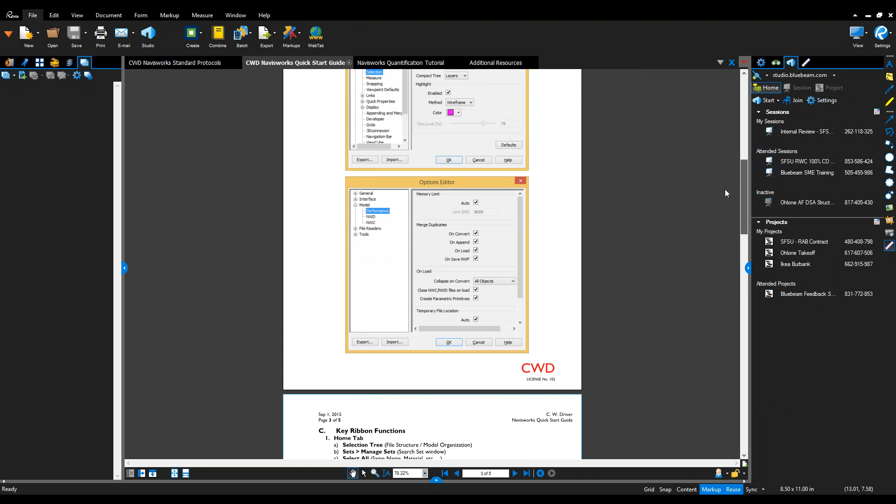All right. So those are the 4 PDFs we're talking about. Protocols is standard ways of doing things. The quick start guide is kind of a work in progress, but the idea is to get you up and running, kind of a self-tutorial on setting it up and where everything is.

And then we have a more detailed Navisworks Quantification tutorial. It doesn't have any pictures, but it walks you through from start to finish. So a good resource. It's about 6 pages long and goes through all the steps. And then there's a PDF called Additional Resources, which has a link to my old professor Kevin Miller's. He has a bunch of tutorials and information on this same subject as well.

So I wanted to go through the protocols, and then we'll jump into the software. All right? Okay. Any questions so far? Nope. So far, so good.

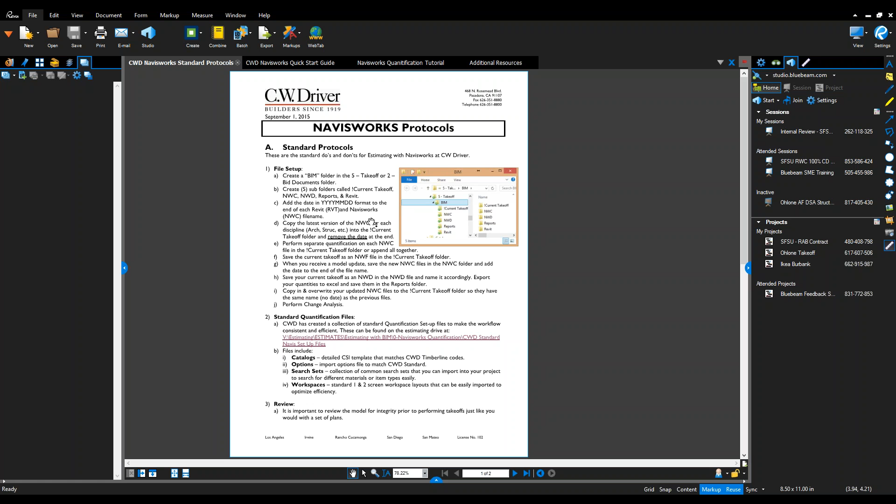So file setup. That's the first thing that we like to standardize when we're using files. So say, Rika, you've got your project coming up where you're going to be able to get the Revit model from the architect early on. The best way that we found is to make a BIM folder either in your takeoff folder of your estimate or under bid docs, wherever you want to make it, and then have these 5 subfolders. You have an NWC folder, NWD, those are both Navisworks file types, and then a Revit folder. That'll be where you drop the original Revit file, and then a reports and a current takeoff.

So that's the folder structure that we've identified that we think is the best, but obviously you can let us know if something's different. So this is in each of the project estimating takeoff files? Correct. Yeah. Which is nice because with Timberline, we don't keep the files in the same job. Right. Timberline is all centralized. Right. Yeah, we could, but we don't do that. So it's nice to be able to keep everything in one place in the jobs folder. Definitely.

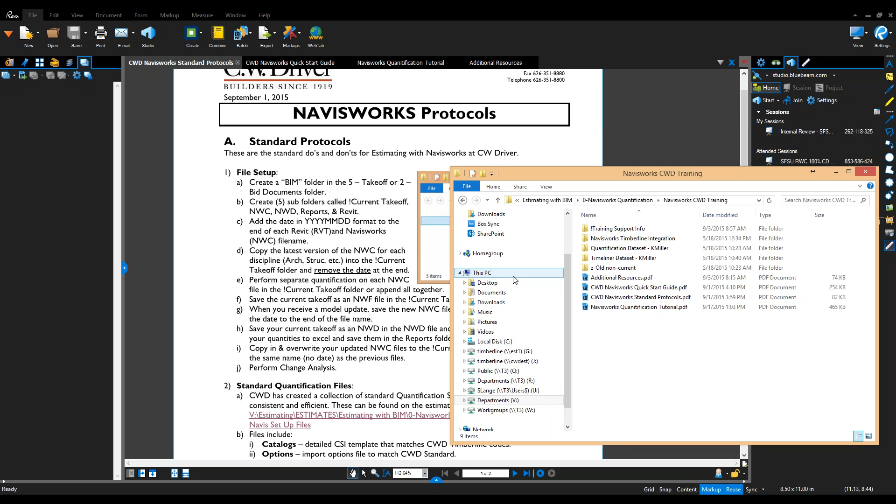So we set up these folders, and you'll notice the files that I had you guys open or download are in that format, that BIM Tutorial Files. So that's the format that I did it. And then we want to make sure when we download the files that we put a date stamp on the end of the file, because inevitably you're going to get updates.

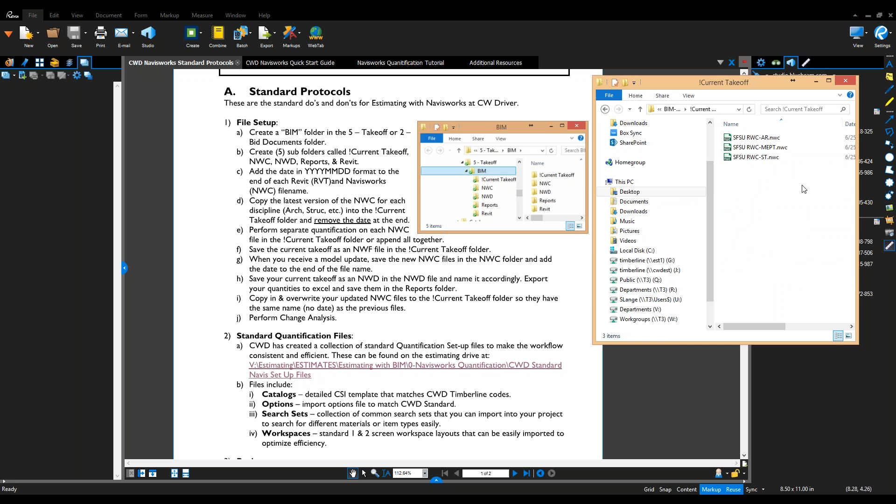And so if you notice, this is the file that I had you guys download. Inside the NWC folder, there's the aquatic, and I put a date stamp. Then there's the architectural, with a date stamp, and the structural, with a date stamp. So the idea is that you can keep track of changes easier that way. Okay? Mm-hmm. And then I have the current takeoff folder where we just drop it in there, and we take off the date stamp. And I'll tell you more why later.

So that's basically the folder structure. Then we have some standard setup files that are in that Navisworks Quantification folder on the V drive. Basically it has standard catalogs, which is like your template for your takeoff. So we've done some work at setting that up for you already.

I even have options. You can import an options file, so you can have the same options as me. Search sets, which is a way to say, okay, I want to find all the concrete in this project and select it all, or I want to find all of the exterior walls in this project and select it all. So ways to get through the model; we set up a bunch of those as standard ones, so it'll make us more efficient. And then workspaces, basically the way that Navisworks looks, you can just import that in and have it be the same every time once you like it.

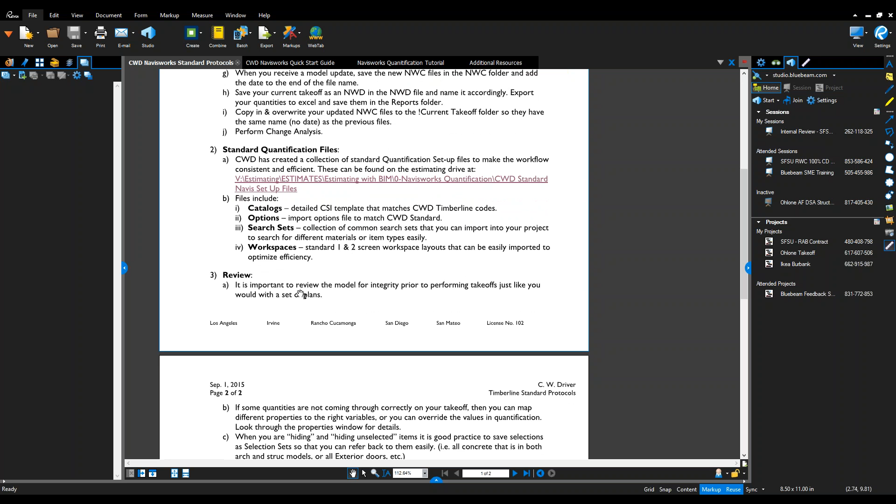So those we'll go through in a minute as well. And then I just wanted to point out on this how important it is to review the model. And I think, Rika, did Todd sit down with you and go through doing a takeoff at one point? He did. He showed me a few steps, and it's been a while, but yeah, he showed me how to do a few of the takeoffs. Okay. And I know, John, the same thing for you, right? He showed you a little bit.

Yeah, I got the early model for the Europa Village, and we played around with it for a while, but like Rika, it's been a while. And actually, we're in the DD phase. We just got new updated plans for that job, so I'm going to probably ask for the model after I bid it, because I don't want to learn something during the bid process. But I do want to get into it after that, so this refresher course is fresh on my mind. Good.

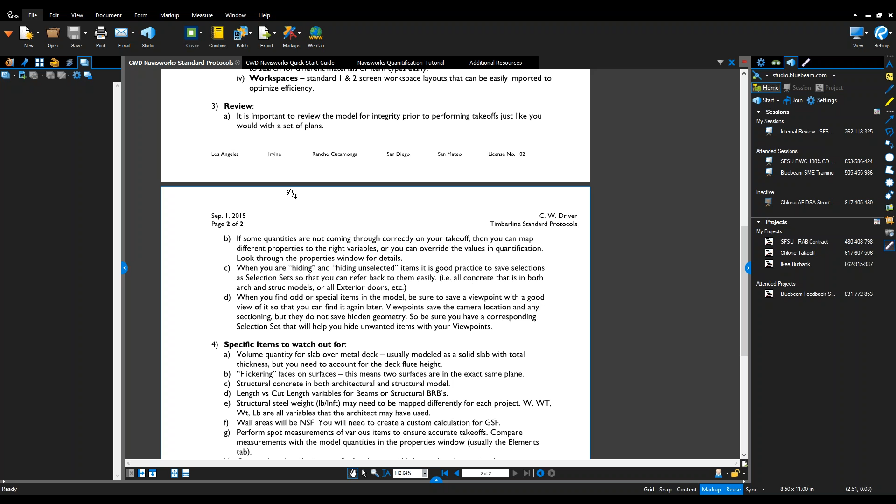So as you guys probably both know and found out, sometimes there's things that are either not accurate or misleading in the model, or can be confusing. So I've tried to identify some of the things that you can look out for. And so obviously it's important to review it so you have a level of confidence with your takeoffs. Just like a set of drawings, right? It can be a crappy set of SD drawings with not a lot of detail. The model can be the same way. You just have to make assumptions.

So some things to note: if you pull through all your concrete and your volume is very different than what you would expect, sometimes maybe the architect changed the name of the variable and they're not coming through all the way. So it might have a 0 volume when really it was mapped as something else. So you can remap variables to make sure all those still come through automatically. That's just something to know at this point, and we can go through how to do that later.

Glad the estimator is still needed. Yeah, right.

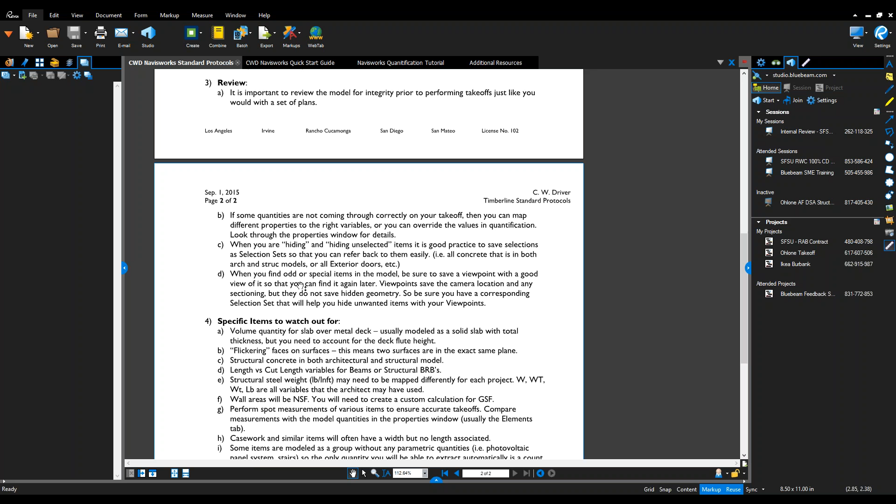Yeah, totally. I think I'm preaching to the choir, but it's no different than a set of plans where you still have to make assumptions, you still have to use your head, and it just helps you do things a little quicker sometimes. It's also good, when you're hiding things with the hide unselected button, to save your selections so you can come back to them later. We'll show you how to do that when we get in there.

And it's the same thing with viewpoints. If you zoom into a location inside the building and you want to refer back to that often, you can save a viewpoint, and it'll jump back to that spot. So those are some things to think about as you're doing your takeoffs. And then these are items that can give you problems. Slab over metal deck is going to have the full thickness, so your concrete volume is going to be heavier than it actually is, because of the flute heights.

If there's flickering surfaces, that means there's two surfaces in the exact same plane, which means there could be an issue. A lot of times your structural concrete will be in both the architectural and the structural, so you have to do a little QCing to see what's your full scope. I'll just breeze through. Wall area is always going to be in net square footage. Usually we take off walls in gross square footage, going right through doorways and windows, so that's something to be aware of. You can override it, but you just got to know what you have. We always perform spot measurements and check the model to make sure things look right.

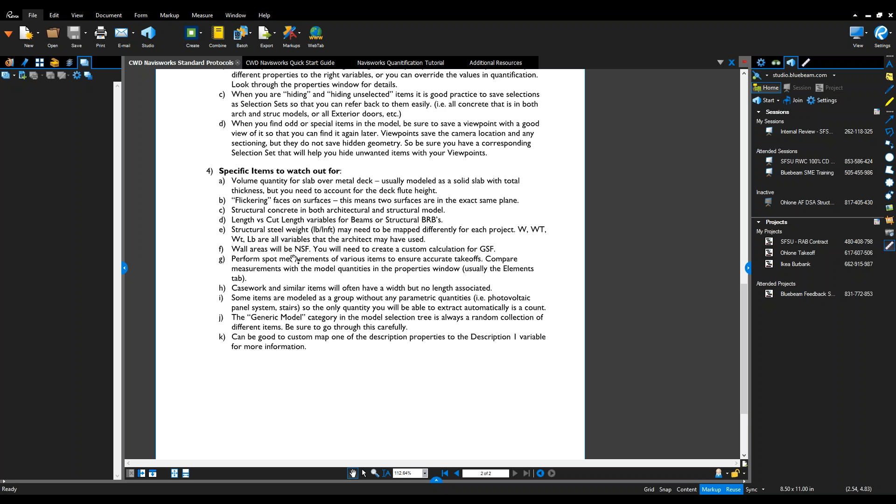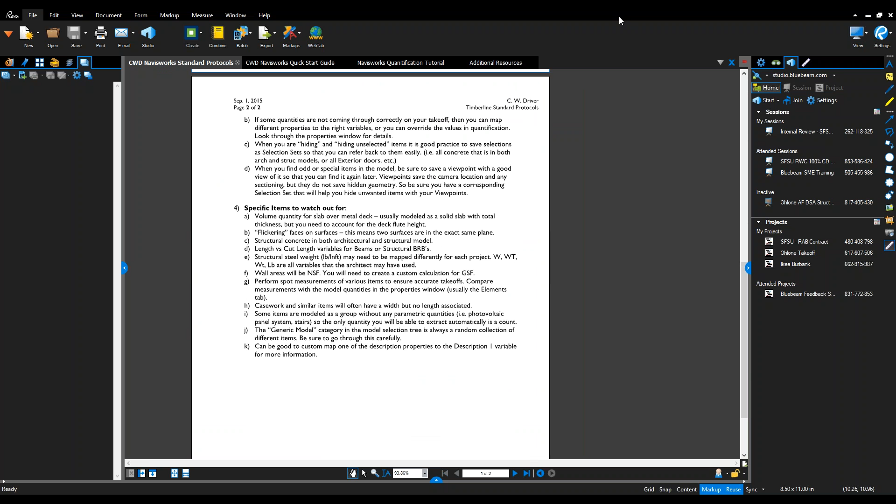And then these are just some other items, but I think I'm just going to jump into the software. You guys can look at this at your own leisure. But I want to jump into Navisworks. So any questions on this document, the Navisworks protocols? No, I think I just need to run through it and run a project with that in mind. Yeah, same here. And it's a work in progress, so I think it's a good start, this little cheat

sheet. So let's go ahead and open up the BIM Tutorial Files, and in here we've got the current takeoff. So let's go ahead and open up the architectural model in the current takeoff. Just double click on it, and it should open up Navisworks Simulate.

So in the BIM Tutorial Files is current takeoff. Right. And within there are SFSU. Correct. Yeah, do the one with the AR at the end. Okay. I'll drag mine. So it's asking how I want to open it. So now, gosh darn it. So yeah, make sure you choose Simulate.

Mine says can't resolve external reference. So go ahead and say ignore all. For whatever reason, that happens with almost every file. I think it has something to do with when you export it from Revit, it was attached to a project file, a family that linked all these different models together, and now we're opening up onesie twosies. So I think that's why. But yeah, always just say ignore all when that happens.

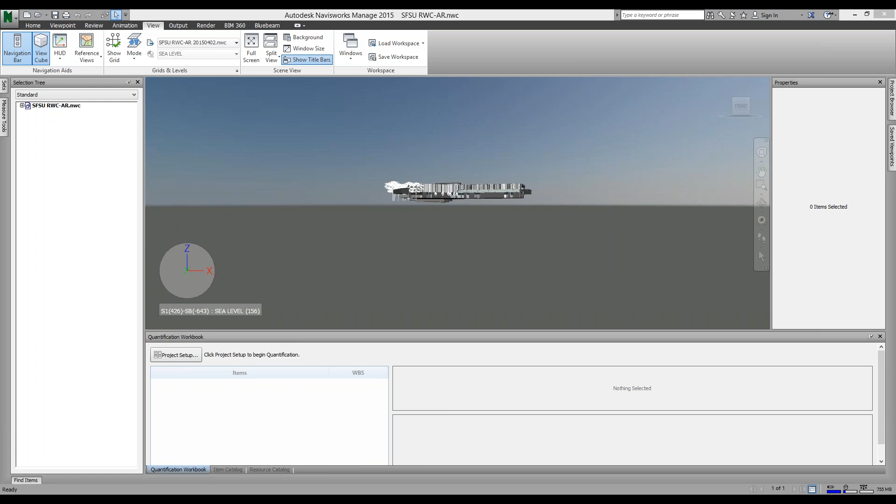Guys, I have to step out real quick. Okay.

Are you able to see it? So double click on the Simulate. Are you able to see my screen? I am, yep. Okay. And then scroll down, see if there's an application file in there. Yeah, it looks like it's not. If you just click on your Windows start button bottom left and start typing in Simulate. Yeah. There we go. So it doesn't look like it's installed. Right, Todd? I don't know.

Right. So I would say we'll just put in a service desk request and get them to install that. I'll follow up with them and make sure it's the license for Simulate. And John, I'm gonna throw up an NWD onto the Q drive so that you can open it up with Freedom, and at least you can get around navigating the model. So if you go back to the Q drive under BIM Tutorials, I've dropped this ar.nwd file. NWD, okay. It's the very bottom one. If you go back up one folder, it's that file at the bottom. Oh. Yeah. So at least you'll get familiar with how to get around.

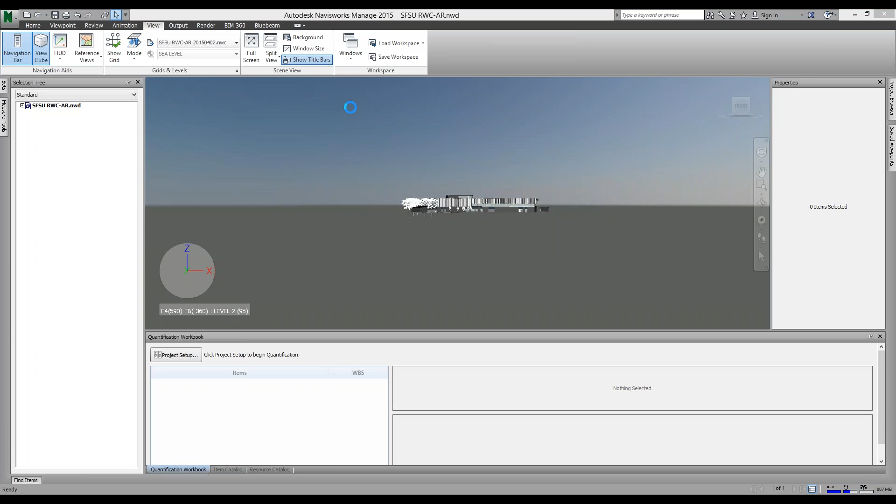Okay, Stuart. So you went back to being the presenter. Yeah. So now, I pulled up this. Oh wait. Should I be seeing? Oh, there we go. All right. It's loading. And it'll probably have some external reference errors, so you just say ignore all when you see those. Okay. So let me know when it pops up. Okay, 100%.

Doesn't look like anything. Oh, there we go. There's another screen coming up. I think nothing popped up, so it's kind of populating the drawing. Okay. So I'll just kind of walk you around this. I know you're a little familiar with it, but basically you've got your model view screen here. You've got your view cube.

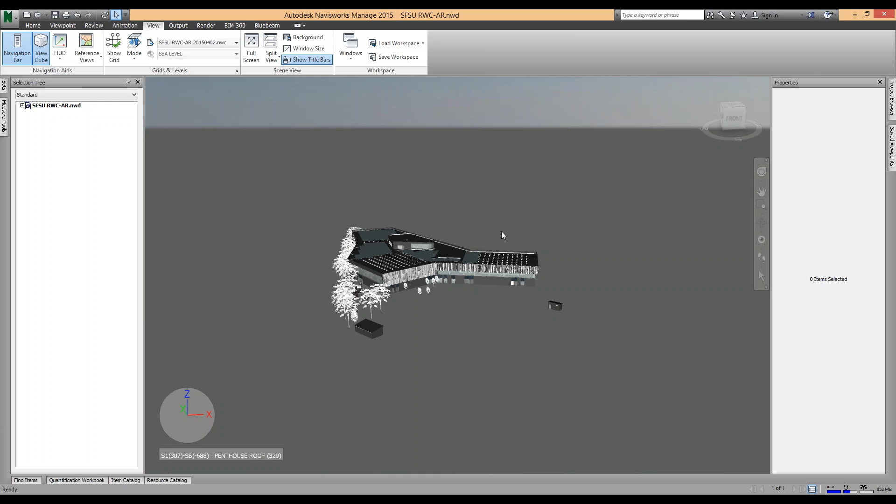So with this, you can always hit the home button, which sometimes if you kind of get lost off in space and you're like, where'd the model go, or you're zoomed really out, you can just come here and hit the home button, and it'll give you a nice shot of the entire model. Okay. You can also click and hold down, click and drag to rotate using this. Yep, I remember that one.

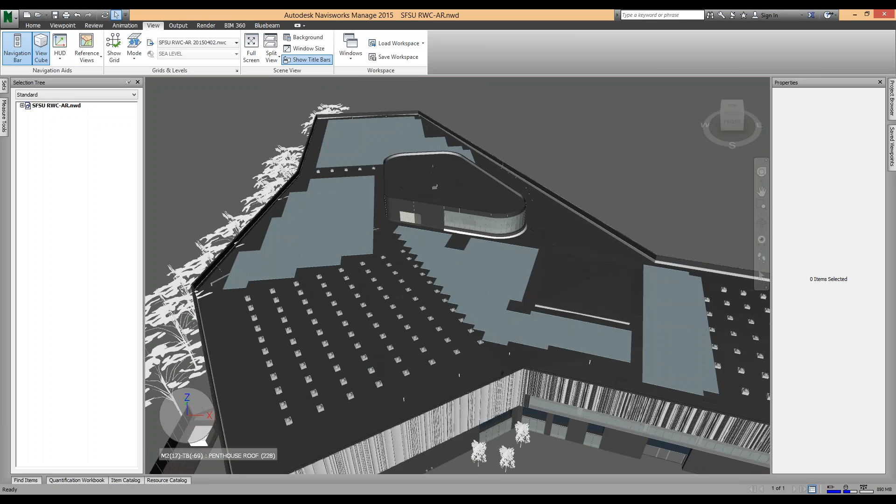And if you click on your scroll wheel and hold it down and move your mouse, that's the pan. So, and then just scrolling your scroll wheel zooms wherever your pointer is. So between the pan and zoom, you can get around your model pretty good. And then the last one you need is the orbit. So you can either use

the view cube, but I like to hold down shift and then click on the scroll wheel, and that orbits. Okay. So those three movements are the way I get around the model the most. I zoom, pan, and orbit to get around. Okay, are you able to do that?

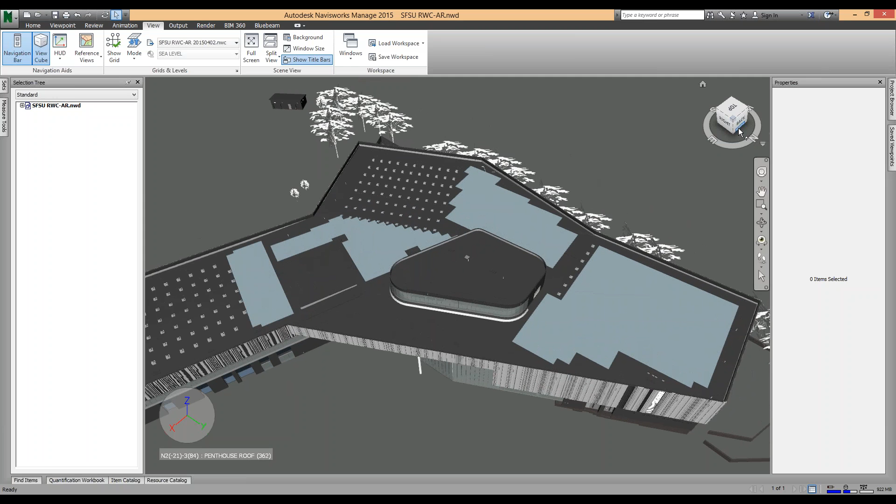Okay. Well, I've got to go, because I've got the, okay, so here we go. Wait a minute. So, I'm back on, Stuart. All right, cool. So every time when I went back into the file, it repopulates. It's a little slow. Oh yeah, so I would probably copy it down to your desktop and then do it. That's because it's on the network drive. That's why it's probably a little slow.

And you can also change the rendering settings on it if you want to do that. Under Viewpoint tab. Right. And then lighting mode, yep, to shaded. So are you still on my screen, Todd? No, I'm looking at Stuart's. Oh. Yeah, because right now it's just having a hard time populating. So should I just save the whole thing? Let's see. Yeah, I think bring it local. That'll be the first thing, and then the second thing is I would change your appearance so that it's shaded.

And so Rika, why don't you do that as well? So go to the Viewpoint tab, and then we're going to go to Mode, and then Shaded, and you'll notice it's just kind of solid colors now. And so that'll help. That usually helps a little bit, and we like to do that in quantification anyways. I don't see a mode in the Viewpoint tab. It'll be under the render style. If your window is a little smaller, it might be squished together. But

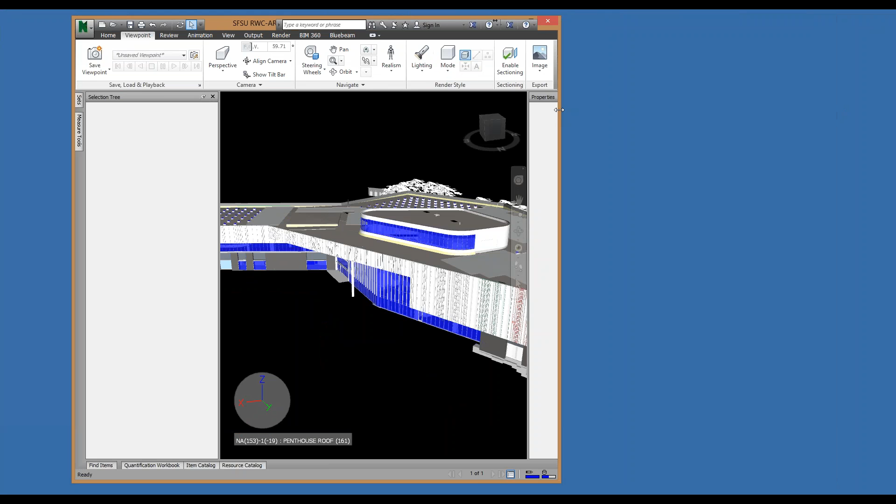So for instance, the first thing I want to do is save it to my desktop. So I'm trying to do that, and wouldn't that be at the home button, file option? It's actually the N button. Right here. It's that N at the top left, the big N, and then you can do Save As. Oh, I see.

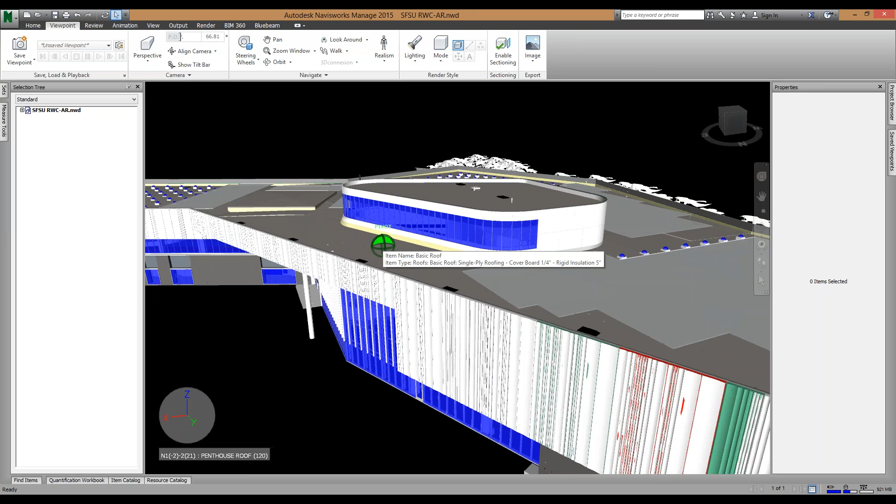So while you're saving that, Rika, basically getting around, there's three tools I use. It's Zoom, which is scroll. You just scroll and it'll zoom wherever your pointer is. And then if you hold down the click wheel on your... You mean the scroll button on your mouse? Yeah. So is that working for you? So if you scroll down, it'll zoom in, and scroll up, it'll zoom out. Yeah. And then... Go ahead.

I can't save it. I hit that N button and there's no save options. It's new, open. So what you want to do, John, is go to your file where I saved it. Let's see, and just copy that NWD file. Okay. So I get out of this? Get out of it. Yeah, you can exit out of that, copy it, and then paste it onto your desktop, and then open it again. That's what you'll want to do.

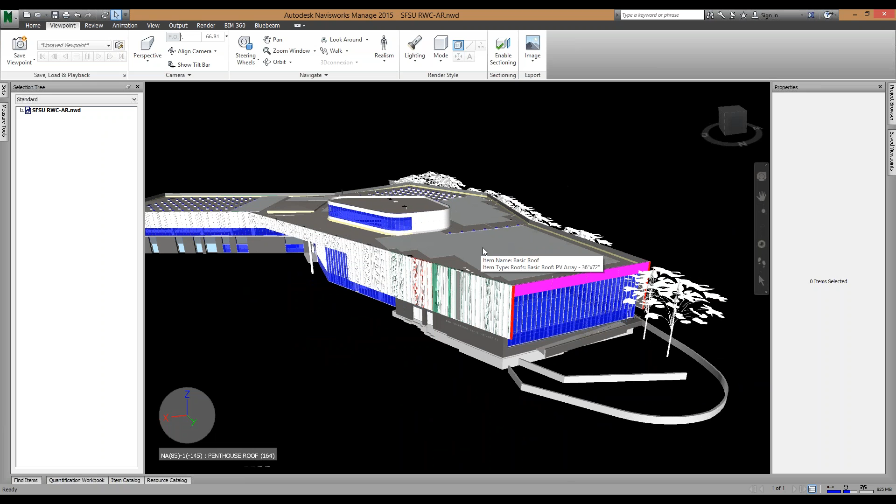So Rika, you've got the zooming, and then pan is you click and hold your scroll wheel and then move your mouse, and that lets you kind of pan over in the same viewpoint. Okay. And then if you hold down shift and then click the scroll wheel, you orbit. And it orbits whatever you last zoomed on. That's the pivot point. Okay. So those tools, that's how I kind of get around. I pan, zoom, orbit, zoom, orbit, zoom, pan. So that's kind of a good way to get around.

There is also the walk tool, which you can get to under the Viewpoint tab, walk. Same with pan or orbit. You can just click those and be in that mode. But the walk, there's a shortcut for it, is a good kind of smooth way to walk through the model.

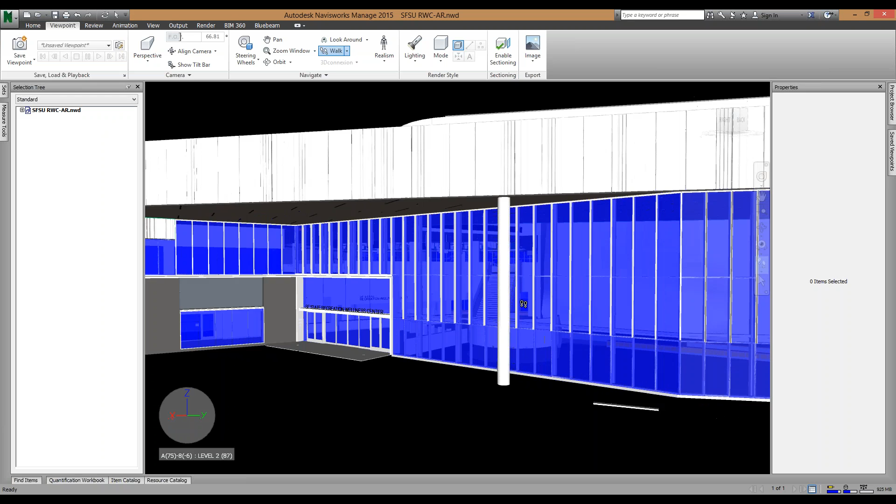So it works where you click and hold down your click, and then if you go up, it moves you forward while you're holding down. Back moves you backward, left turns you. So you can kind of walk through the model, walk through walls, and get around that way too.

And if you want to go up and down, you can either click and hold the scroll wheel and then go up, and then kind of walk through so you're right on the right level, and then click and hold on the scroll wheel and drop down. Let's go down a level. Let's see, here we are.

I'm really close to a wall here. I'm going to back up. So that's kind of the basics of getting around Navisworks. Does that make pretty sense?

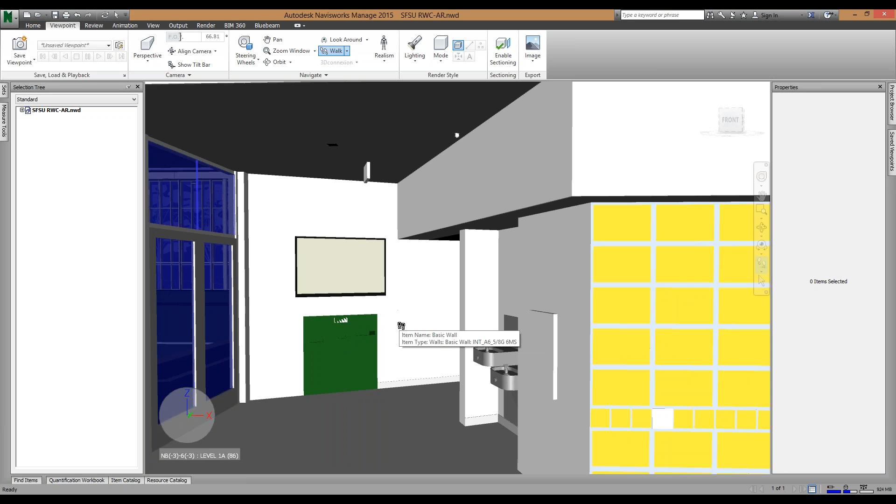Yeah, I know. Playing around with it a bit, and the screen kind of moves. You lose your...

Yeah, and then if you don't click the scroll wheel, and you just scroll up and down, it looks up and down, like tilting your head.

So it's kind of like... how do I get into the building? I can't seem to get in. It keeps moving the whole building up or down.

Gotcha. So if I'm outside the building, are you able to walk forward? So just in walk mode, you just click and then drag up, and it moves you forward.

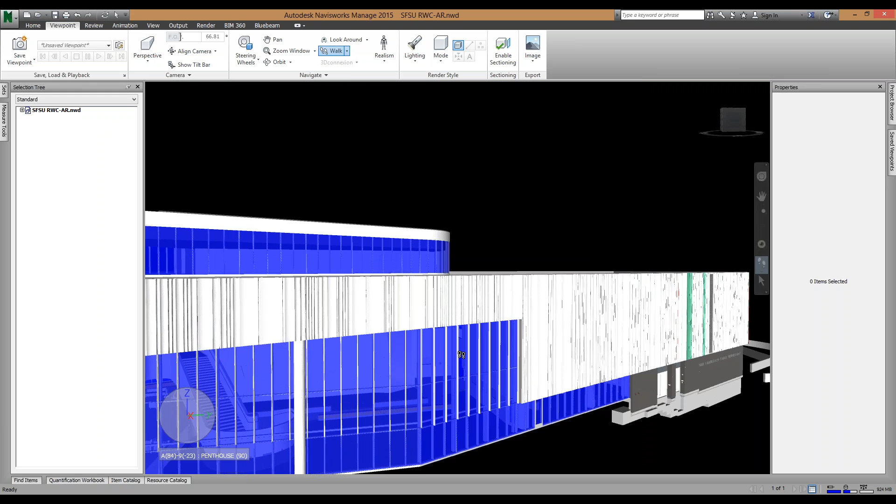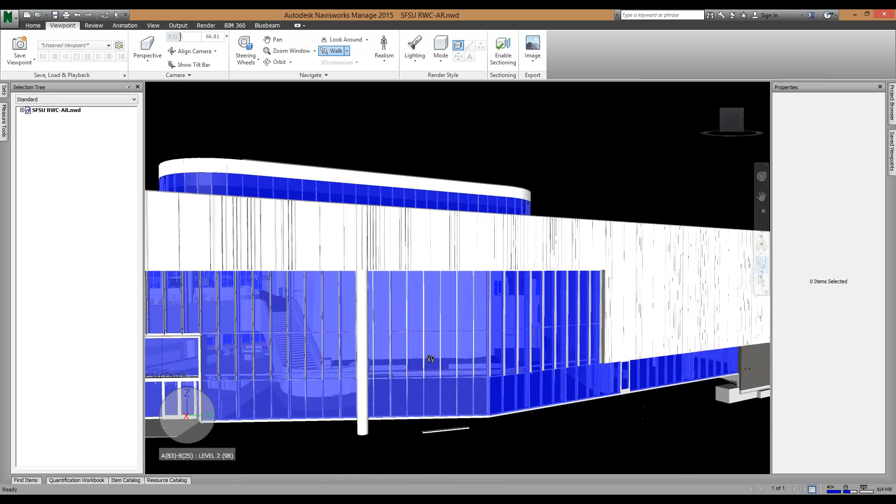So if I walk to the front of the building and then just drag up... yeah, it still keeps me on the outside of the building.

Does it hit like you stop? Like does it feel like you're running into it and then you stop, or is it... are you no, it actually moves the building up or down, or forward or backwards.

I'm sorry, let me give you the screen so I can see what you're seeing.

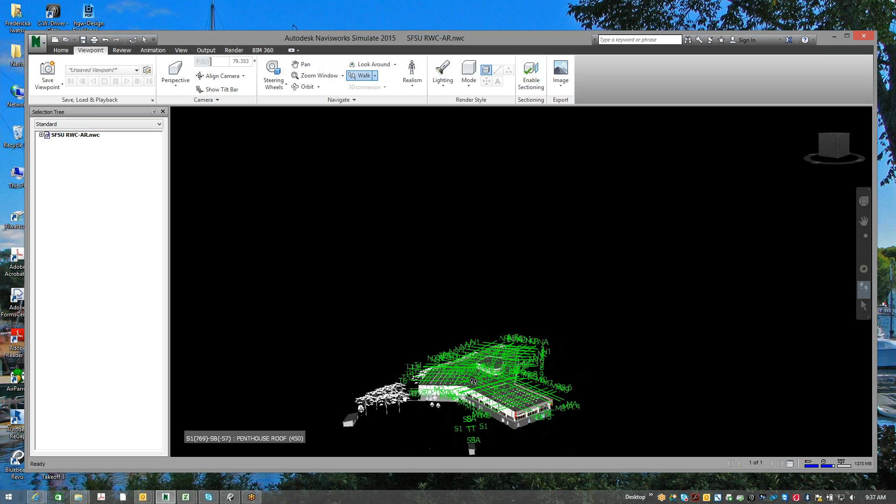And then, so yeah, that's tilting your head up and down. So come lower. Now we're getting closer, okay. And now scroll, just scroll up just a little bit. There you go, so you're looking more straight at it.

And now walk straight at it by just left clicking and then dragging up. Oops, sorry. It's okay. So that's with your left click instead of your scroll wheel.

Try left click, it keeps giving me that. Yeah, just like the regular click. My other left, you mean? So...

There we go, okay, back to basics. Yeah, there you go, all right. Software, it's all weird, there's all these little shortcuts. It's never the user, right?

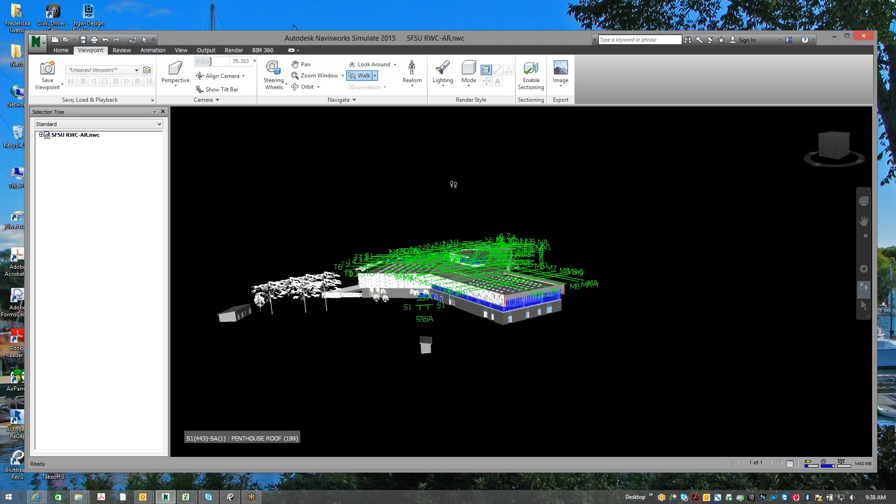Yeah, right. So you can kind of go between clicking up and dragging, walking straight, and get closer and closer. So click and then drag up again. Let's walk a little closer. Let's walk till you're right over the middle of the building.

Yeah, okay. And if you drag it a little left, it'll kind of veer you to the left. So that's the pan, that's your click wheel, your scroll wheel. So click just the left click. Oh, now you're turning. Yeah, see how if you go right, it turns you.

And now just click and drag straight up. And let's go till you're literally... the left key, the left click straight up. Yeah, left click, okay.

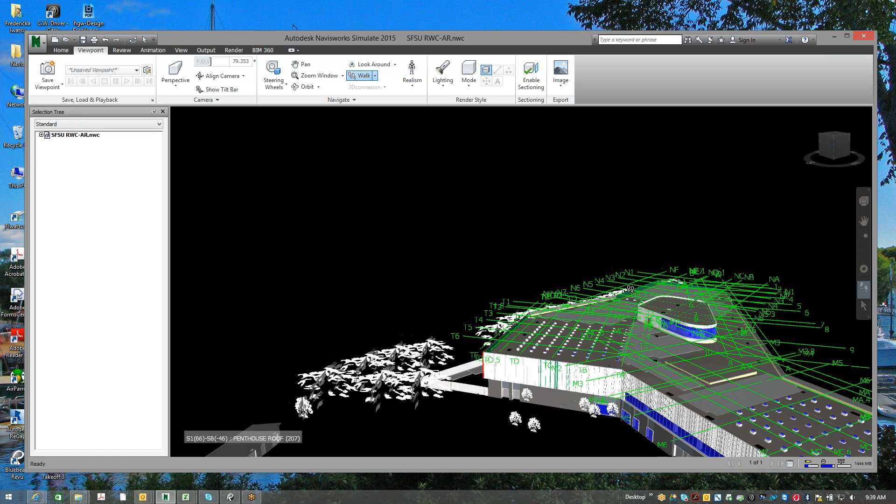Okay, keep going up. Yeah, keep going, and then you can veer it a little to the right, so you're turning towards that penthouse. Oh yeah, it's sensitive. There you go, a little more. Let's go a little more till you're standing over the building. Think of your viewpoint as you. Keep going a little more. Okay, now click the scroll wheel, hold it, and go down. Let's drop you down inside the building.

Okay, so I literally had to be over the building? Yeah, exactly. Got it, wherever you're. Oh, still not quite. Oh okay, that's close, sorta. So now just go forward a little bit, with the left click, not the scroll wheel. There you go.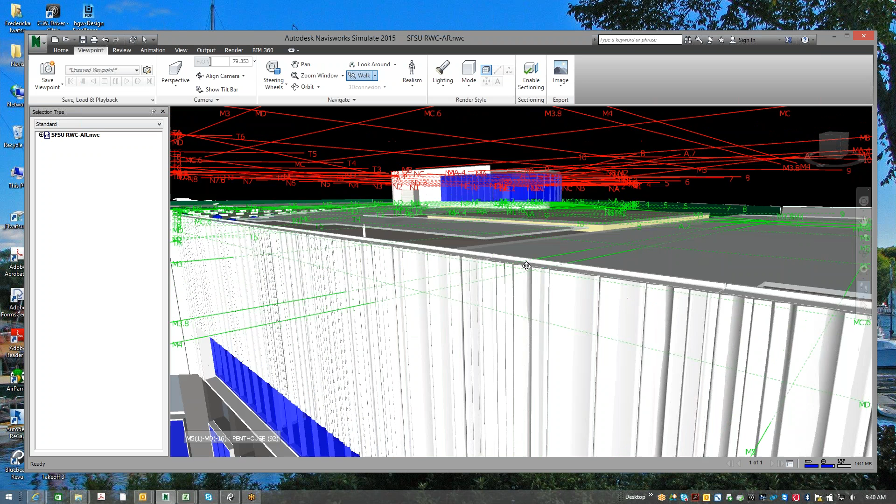Now I need to come down a little bit, right? Yeah, so you can move forward and then come down. Oh okay, got it. So it's kind of two different modes: with the left click it's more just going left, right, forward, back. With the scroll wheel it's up, down, and then sidestepping.

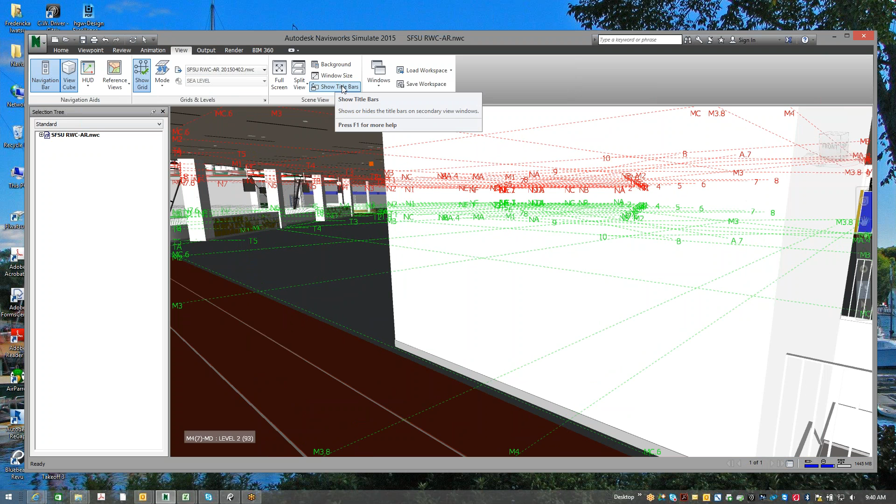Okay, so I noticed you got all your grids on. So go to, is it View? Go to the View tab, and click on Show Grid, then unclick that button, and it gets rid of all those grids. Sometimes that's nice, but we don't want them right now. Do you want the screen back? Or I guess you can take that back, huh? Yeah, let me grab that back.

And John, are you still on? Are you okay? I was just watching you guys because I was trying to do the same thing with mine, and it was very confusing. But then the grid deal really helped. Yeah, now it's much better without them.

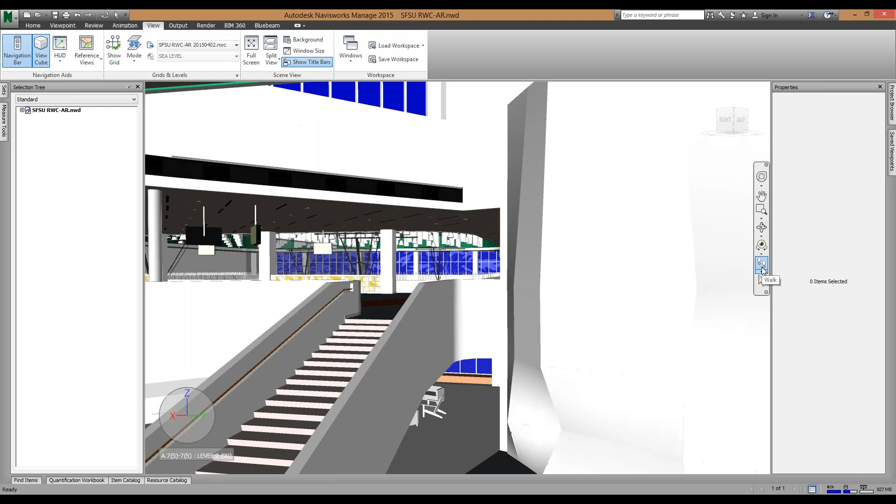So yeah, I'm sort of, you know, I'm using my mouse to go in and out. Okay, and then when I do that, there's a little pivot type thing that comes up. Yep, so when you're in the pointer mode and you scroll, that zooms in, and it shows where your pivot is. Oh, that's just, okay, so that's nothing big.

And then most of it is done by what you call the scroll wheel, is that what it is? Which is, or the cube, I guess? Well, so the scroll wheel and the cube can both do kind of similar things. Using the mouse is like the shortcut, but you could also drag the view cube around to orbit around your last pivot point. Okay, so I see what you're saying. So I set the pivot point with my mouse, and then I can orbit around with the cube.

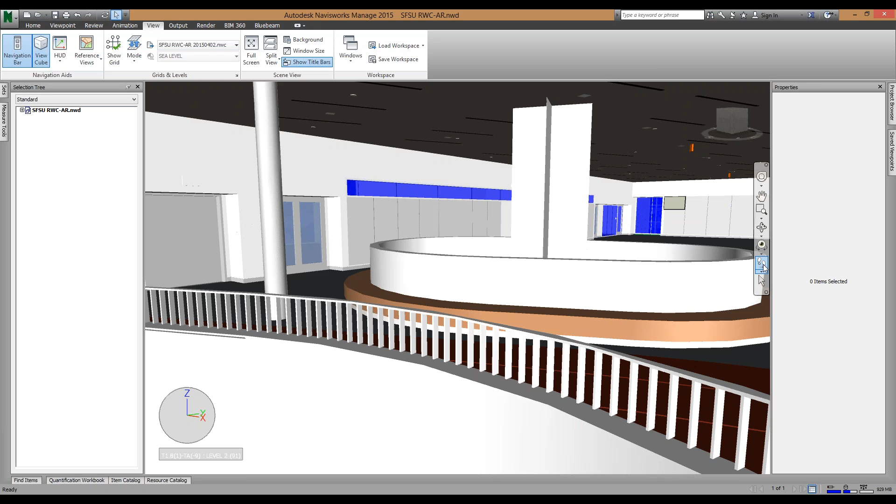Yeah, and then, okay, so there's a cube, and then there's that little circle around it. Yeah, so you can also click on the faces, and it'll give you kind of standard views. That's what the circle around is for, just for reference. So I can click on any part of this cube, and it'll give me that standard view, you know, elevation view.

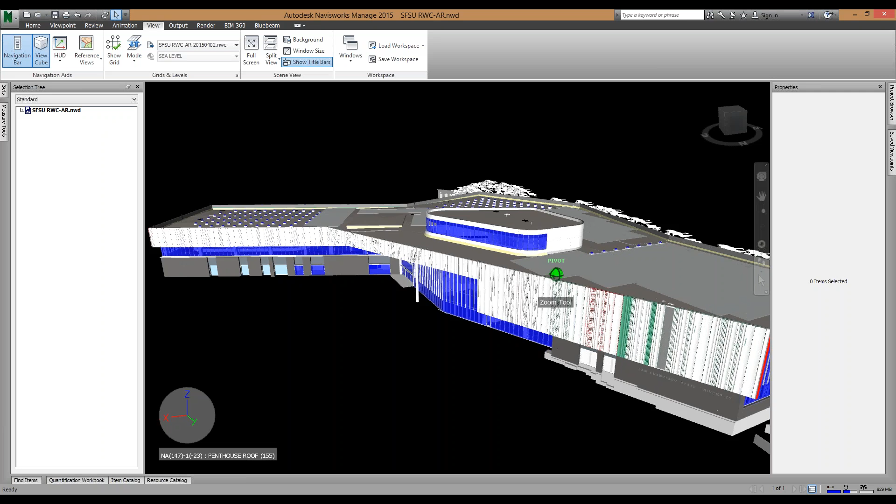So did you ever, when Rika was saying to walk in the building, you actually didn't, you got close to it, but you didn't walk in. Yeah, so you can by using the walk mode. Oh okay, so there's the pointer mode, which is zooming and orbiting, and then there's the walk mode, which is literally like you're in a video game, like a first-person shooter. So by alternating using the left click and dragging or the scroll wheel click, you can get around and then walk right through the building.

Okay, I really have to get into gaming. Yeah, right. So I'm gonna keep moving forward because I want to get into the quantification part.

So let's make sure we're on the viewpoint, we're in the mode of shaded. Viewpoint and then mode shaded. And then if you go to the home tab, we're going to start quantification. So when I drop down my mode, there's no shaded. It's above and below, above, below.

Are those his 3D grids, or the grids that it's referencing? That's what it sounds like. So would it have been some of these? No, under the view rather than viewpoint. Gotcha, yeah, there's two modes. Yeah, you're right, good call. So it's under viewpoint. Oh okay, and then mode shaded. Well, under viewpoint, I don't have mode.

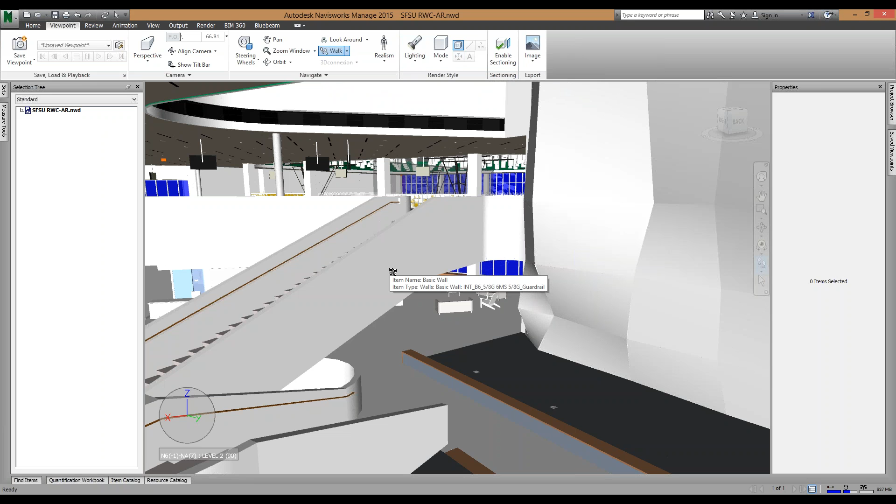Okay, good. So now, John, we're going to be moving forward with things that are in Simulate and are not in Freedom, so you'll just kind of have to watch at this point until you get that installed. So basically, those steps are you come to the Home tab, and then you click on the Quantification button.

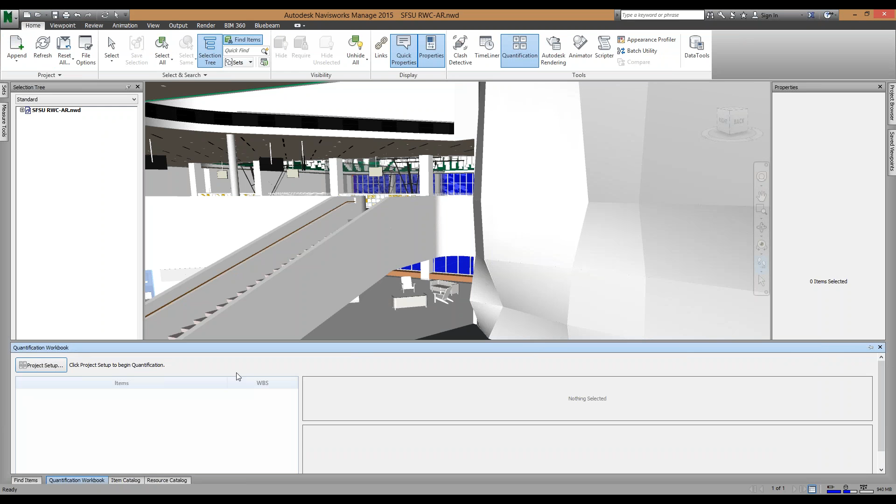Which opens up your quantification workbook. And it may or may not be pinned, so you can pin any of your windows and make them stay by clicking on that little thumbtack. And then we want to click Project Setup under the Quantification Workbook.

So are you there, Rika? Yep, project workbook, and it comes up asking would you like quantification getting started tutorials. Oh never mind - yeah, so then it should bring up the wizard. Sometimes it asks if you want to learn more or something. Yeah okay, I got the wizard - I think the same screen you have.

Cool, so let's just for basic purposes do no catalog, so say none, and then next, imperial, yes. Model volume, we're going to change to cubic yards, just because usually that's what we need, and then next, then finish. You said model volume cubic feet, right, or cubic yards? Yeah, change it to cubic yards. Okay, next, okay, right.

And so right now it's all blank, the quantification workbook. But I just want to show you how to do a standard takeoff, and then later I'll show you how we can be more detailed and actually have like a CSI template, which Todd probably showed you before.

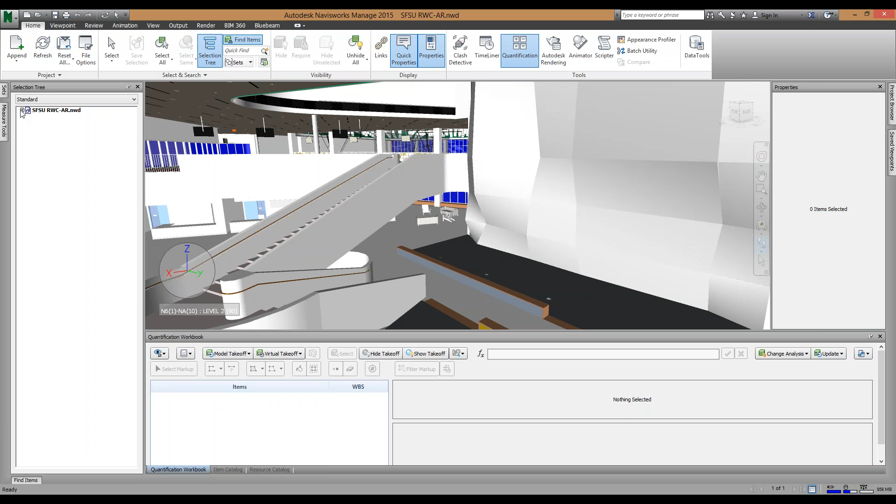So do you see your selection tree? Yes. Okay, if you ever don't see something, you go under the View tab and then Windows, and that's how you turn on or turn off different items. So the selection tree is checked, so that's good because we want to see it. But if you didn't see something else you wanted to, you can click here.

Okay, so this is the architect - basically this is the organization of the model. And so let's click on an item - go to the pointer, and let's click on this climbing wall. I didn't get to that area. Oh gotcha, so you're probably somewhere else. That's fine - so if you just click on any wall or item or piece in the model, it'll highlight.

Okay, got it. And then over on your Properties tab, which on mine is over on the right here, you can see there's all these different tabs of different properties. Okay, mine didn't come up with properties. So a way to get there is to right-click on what you selected and say Properties. I thought you could do that. I don't see a tab that says properties when I right-click.

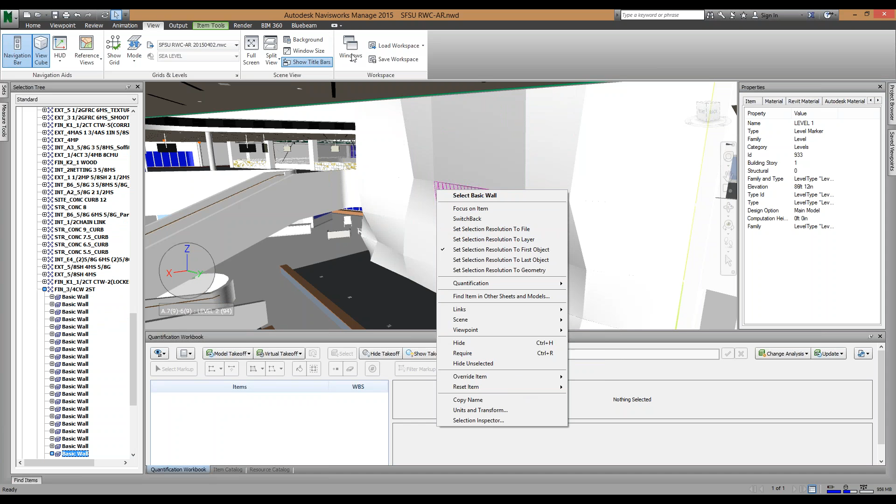So let's go to Windows under the View tab, and then turn on Properties. Okay, there, now I see it. So whatever you select, it'll adjust to show the properties of that item.

And so on this wall that I'm on, you can see there's lots of different categories of properties. The ones that usually have info are the Element or the Revit Type - those two seem to have the most useful information. Go ahead. I'm sorry, I hit a glazing element. Okay, I have Revit material, Autodesk material, element ID, timeliner, and material cell. Is the element ID the same? No, I don't have an element.

So if you right-click on that item again, say Set Selection Resolution to First Object. Okay, it had last object. Yeah, and now click on a different item or click back to that item, and it should show up. Okay yep, it did. So element and Revit type, those are the important ones.

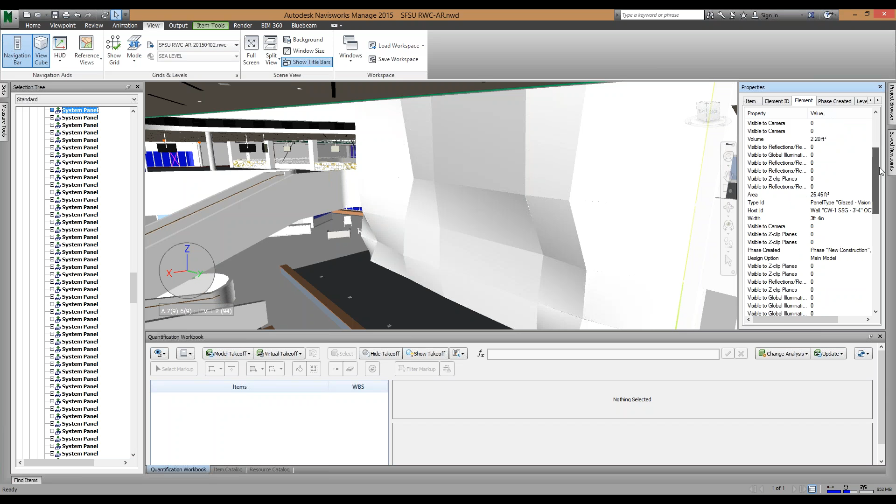Yeah, so it's a way to kind of get around and learn a lot about the model just by clicking through and looking at the properties. But you can also check - wow, is this actually a 390 square foot area? You know, you can kind of do gut checks.

So I want to show real quick - to perform a takeoff, there are 3 ways to do it. You can either drag and drop from the selection tree. Let's do that together - let's take off all the egress gate covers. I'm going to find that under casework and then egress gate covers, and I'm just going to click and drag it down to my quantification workbook.

Okay. And then this is a group and this is an item. And so if I look here, this kind of summarizes your actual quantities that you took off. So if I click on the egress gate cover and then drag this item over, I can see some of the measurements. So it's got an area, it's got a volume. Okay, I'm going to count there, yeah. Yeah, so that's one way you can drag from there.

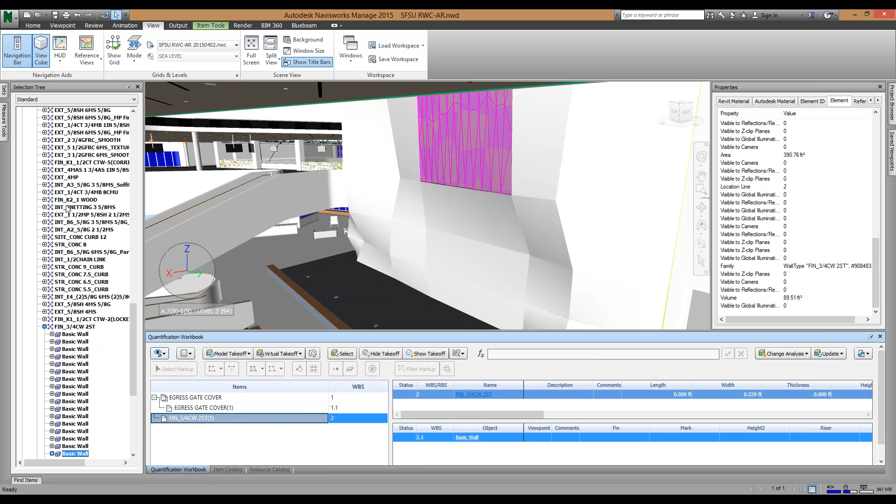You can also right-click on an item that you click in the model, and then say quantification, and then take off. That also takes off that item. And then did that work for you? Yeah, yeah. And then the last way is to select an item, select something in the model or in the selection tree, and then right-click on something in the quantification workbook and say take off item, take off selected model items. But you have to be clicking on a group.

So basically, I like to do the drag and drop. So that's kind of just the actual nuts and bolts process of taking it off. Let's see the easiest way. So we've got just a few more minutes here. So there's the quantification workbook, and then there's an item catalog. So on yours, the item catalog is probably over here somewhere.

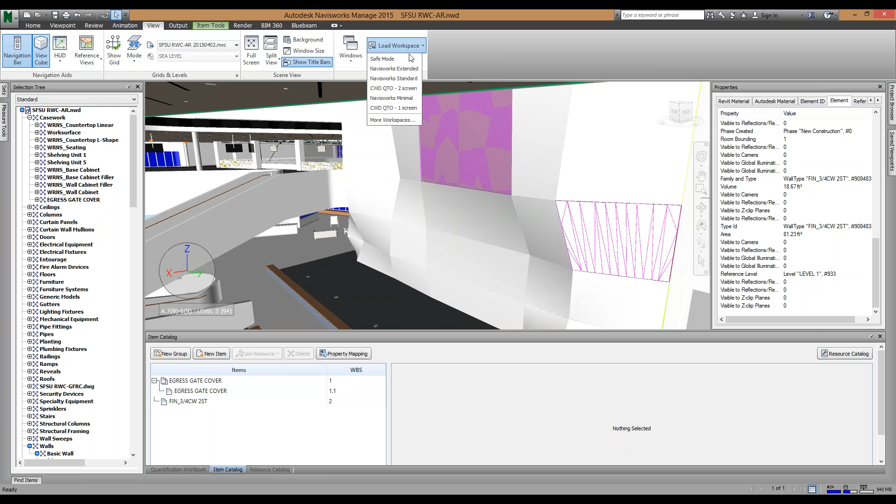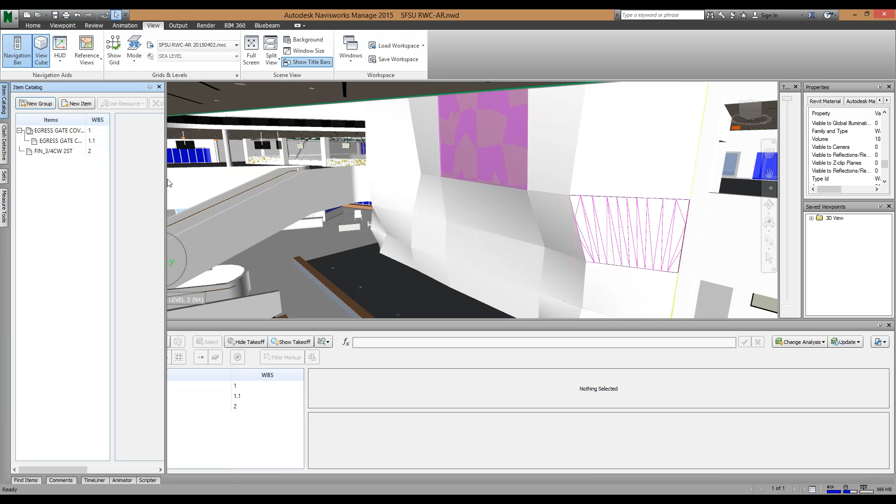Let me. So it's probably over here on the left. Do you see it? No, I don't see it. I don't see your tab, the 3 tabs anywhere on my screen. So if you go to View and Windows, okay, and then turn on Item Catalog. Okay. And then now it should be, I think it usually shows up on the left there. Or did it pop up? No, it opened up an item catalog table. Okay, good. So that's there. That's what we're looking for.

And so this item, you can pin it to your window here. And if you wanted to make changes, it's a little confusing. So you have your quantification workbook, which is where you drag your actual takeoffs into, and it's where you can look at what your takeoffs are. And then you have your item catalog, which is like the structure of your estimate. It's like your shopping cart. This is your actual items in your shopping cart, your groceries. This is your shopping cart. And so if you wanted to change the name of one of these to make it a little better, you can't change it here. You have to change it up in your item catalog, so that's your structure.

And just a quick note. I don't have the ability to pin it. It doesn't give me that icon anywhere for any of the screens. Huh. It might be by itself, and so you have to drag it over until the little icon. So it's probably sitting off like this, something, right? Maybe it's a different shape. But if you click and drag it, you can drag it and dock it to a part of the screen. Yeah, that's all I've done is I just kind of moved it somewhere on the screen. So if you drag it over that item there, the arrow pointing left. Okay. So I'm going to do it again.

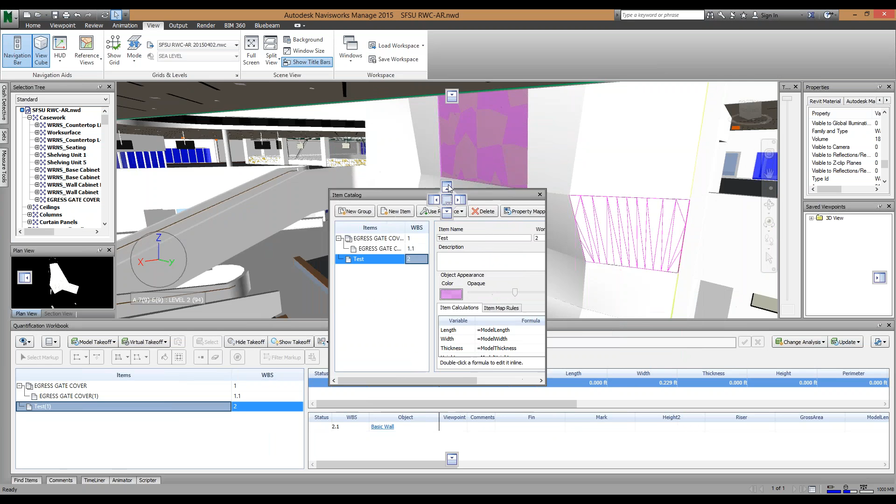So Rika, if you drag it and then you see these little icons that pop up, there's one at the top. Oh, yeah. Bottom. So that's to kind of dock it. So we're going to dock it to the far left. And then that makes it so it stays there and readjusts your view window accordingly. It didn't. Do I have to hit one of those things? Yes. So I'm dragging it, and you have to just drag it and then let go when you're on top of it, and it shows that blue mark. Oh, okay. Nope, it didn't adjust it. Okay, got it. Never mind. And then it shows up the auto hide thumbtack.

And it's a personal preference whether you want it docked over there or if you're working off two monitors, if you want to just organize them on your second monitor, it might be easier that way too. So just got to play around with it for whatever your preference is. Okay.

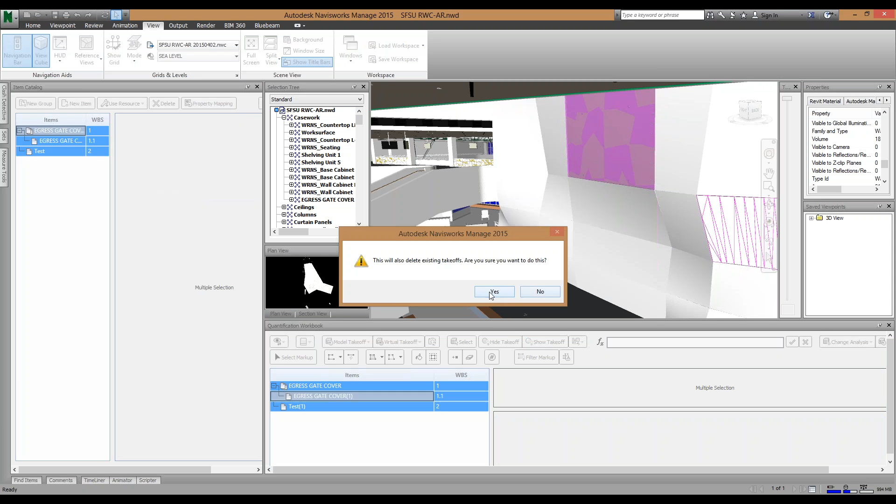So on this, we're going to delete our takeoffs. So if you select all of these by clicking one and then holding down Shift and clicking the top one, and just hit delete or click the button delete, say yes. And we're going to import in a catalog. Okay. Oh yeah, it's over here. So that's on the quantification workbook. Let's see.

Is it here? Yeah. So the far right, you may have to scroll over, but the far right button is catalog. Got it. And then I want you to browse to that shortcut that we made.

Uh-oh, you got some angry estimators. Yeah, right? Put them outside.

Is this in the one you wanted us to save to the desktop? Yeah, this is actually going back to the V drive. Yeah, so if you made a shortcut for Navisworks Quantification.

Sorry about that, guys. Sorry. All right. If you want to just maybe mute yours, John, and then if you want to jump in, you can unmute. Okay. Does that work? Let's see, yeah. What's my mute here? Back in my phone call.

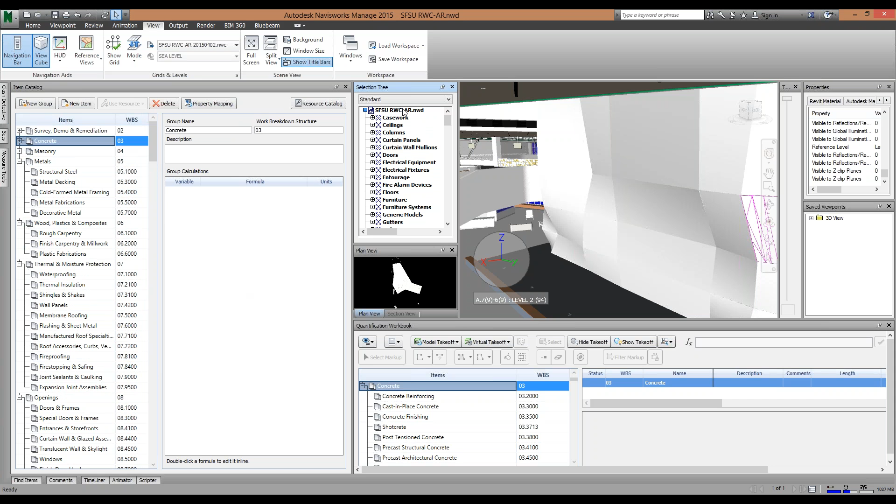But now the idea is you could just take off the entire model all at once, which I think Todd maybe showed you. You could just drag this whole thing down to your quantification workbook, and then you'd have everything. Yep. The upside is it's really quick. The downside is you don't know what's in it. A lot of times, there's this generic models category that has all sorts of stuff, and we don't know what it is necessarily. Some of it may not be named right.

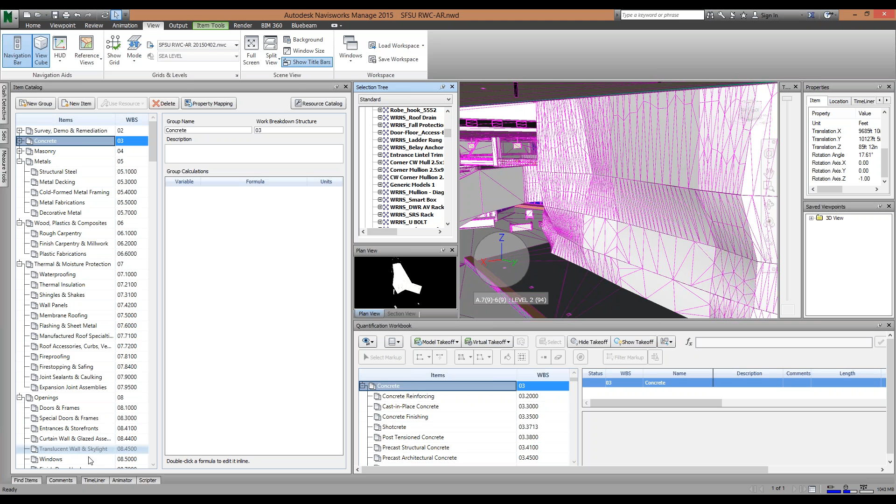So if you have a detailed catalog, now you can go through item by item, and what I do is I work through this selection tree, and I just kind of go, okay, all casework, all these countertops. I want to go to Home and hide unselected. So why don't you do that? So go to Casework, first item, and say hide unselected.

So now I see just those countertops. Where do I find the hide unselected? If I go to Home. Yeah, it's under Home, and under Visibility, there should be a hide unselected and then a hide. Visibility. Okay, got it. So now you can kind of see. I use these buttons a lot.

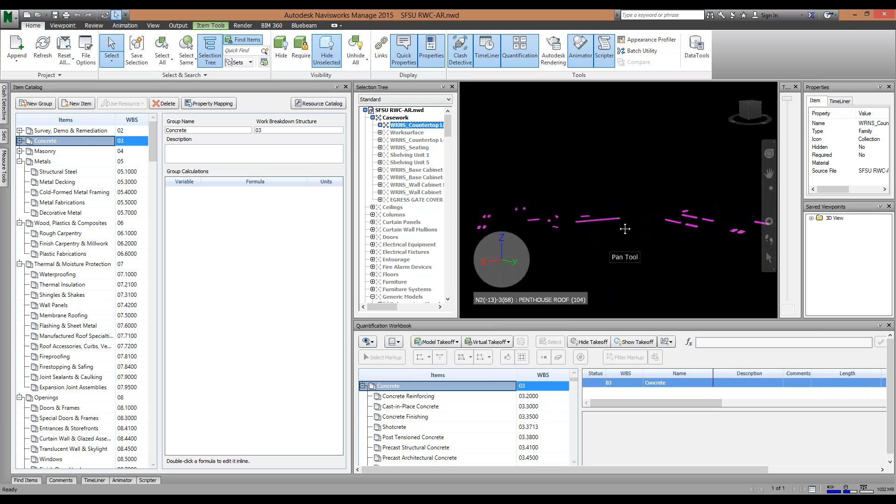So you can do that for all sorts of different things, and then you can say unhide all to bring it all back. And I could say, okay, I just want to see my casework and floors. So I can hold down Control and click both of those and say hide unselected. And now I have some context of where these caseworks are inside my building as it relates to the floors. And I can zoom around, and I can walk around and kind of

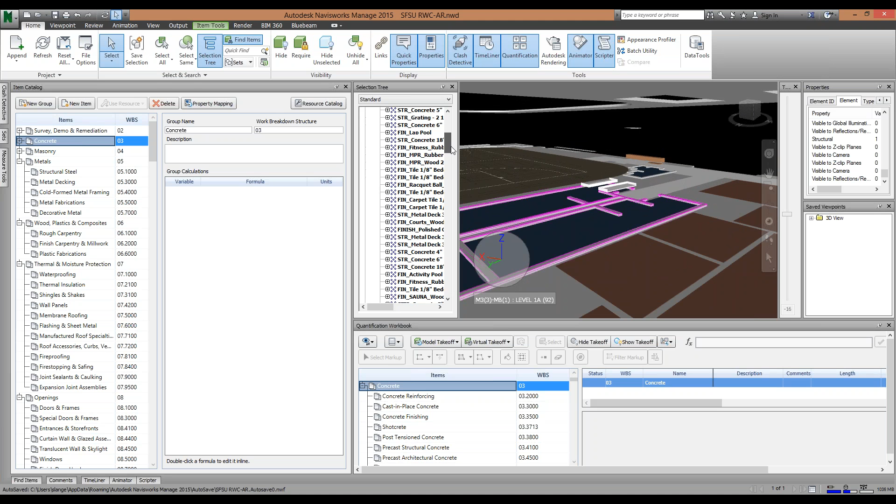inspect. Okay, interesting. It shows these kind of curbs. And I can click on that. What is that? And it says, oh, that's a 4-inch concrete curb that was actually in my floor category. So, okay, interesting. And so you kind of just get to know the model a little bit. And so I'm constantly hiding unselected, I'm hiding things to see it better and to understand it better.

But yeah, so once you get a comfort level, okay, all these casework items, these countertops, linear, I'm going to click on one, look at my element properties, and say, let's see, my height is 2'10". That's interesting. So I don't really need that. Gives me a volume. Here's my length, 43 feet. So I'm going to come through and measure this to double check it.

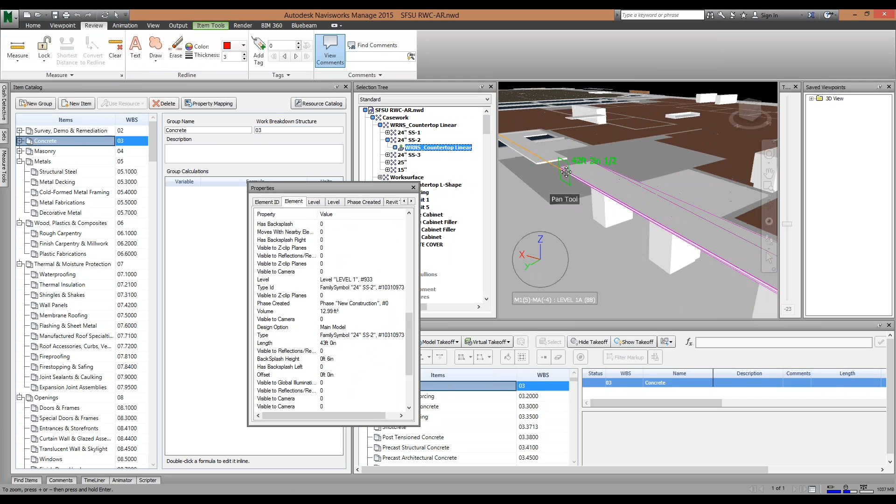And so I can go to the Review tab and then click on the Measure and then a point-to-point measurement. And then I can click on each corner of this item and measure it, 43 feet. So that's exactly what it said. So now I know I can trust that. So 43 feet, 43 feet. So you get a confidence level with the model when you do some spot checks like that.

So now I can go ahead and I'm going to take off all these countertops, and I have to take it off to my quantification workbook. So here's my woods, finish carpentry. So I can just drag all those down into there, and then boom, there's all my takeoffs. And I just kind of work through the model like that, item by item. And by the end of it, you have an Excel spreadsheet with all your quantities.

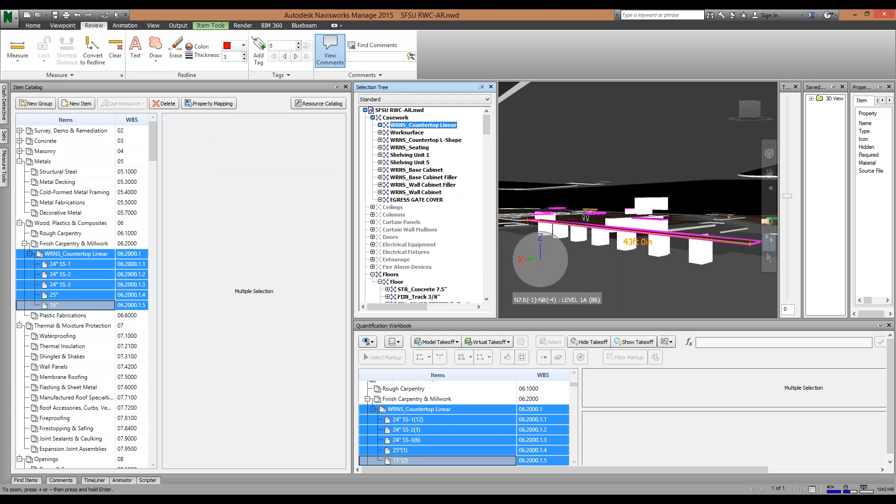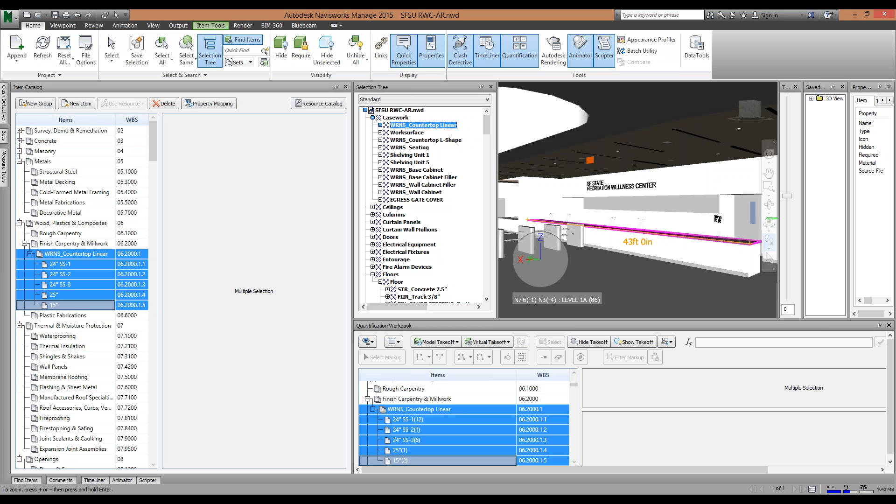So we're about at our hour limit. I know I kind of rushed through a lot of that, but do you have any questions, Rika, in particular? I do. There's nothing we can do in here that would screw up the Revit model itself, right? That's correct. So if we make a mistake, we can freely go through icons. Definitely. Great question. That was my fear before. It's like, uh-oh, what can I... yeah.

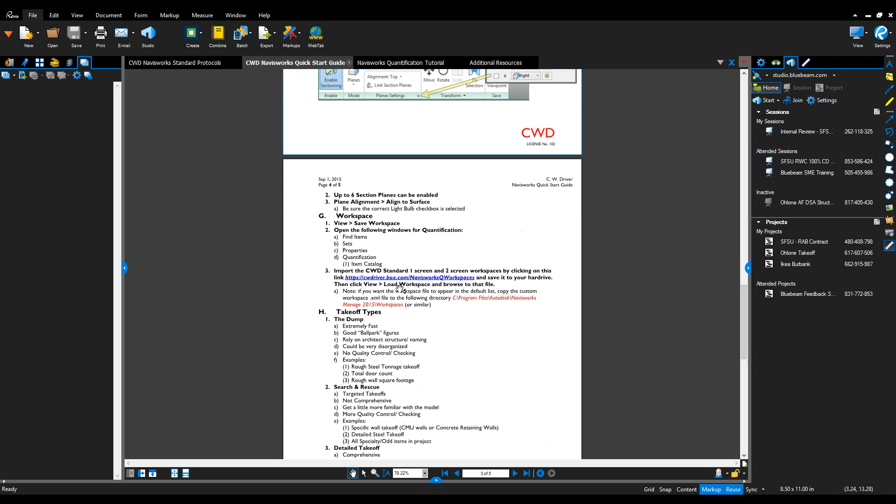And then everything you went over, step-by-step, that's all within those 4 PDFs that you showed us earlier, right? Okay. Yeah. So it should all be here. Okay. So the Quick Start Guide is more just getting you familiar with the layout and everything, and it goes over the different types of takeoffs you can do. But this tutorial is more of a step-by-step: create new quantification items, then quantifying model objects, and it just kind of walks you through the process.

And then the one that you had us load up to our desktop, we can play with that, if we're not in a project where we need to use Navisworks right away, or there's a long duration between, we can use that and get more familiar as we go and try to get more efficient in the program.

Definitely. One last thing I want to show you guys is part of those standard setup files. There is a workspace file. So if we go to, where did I save that? Estimating with BIM, Navisworks, standard Navisworks setup, workspaces. I have some workspaces: if you're working on one screen, this one works good if you're doing takeoffs. If you're working on two screens, this one works really good.

And so in order to load those, you go to the View tab, and then Load Workspace. You'll notice there's a few that are built in. There's a Navisworks Minimal, a Navisworks Standard. And then you click on More Workspaces, and then you just browse to that place on the V drive. So that's why I was saying make that shortcut. Estimating with BIM, Navisworks, Standard, Workspace.

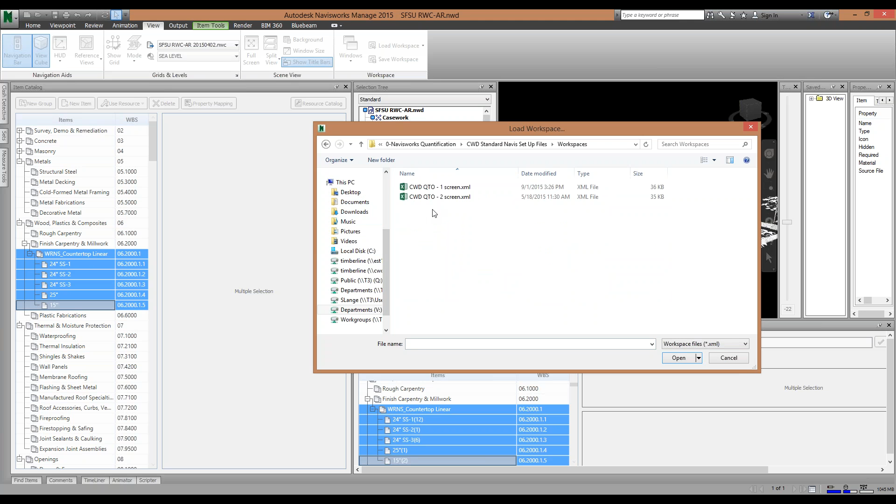And if you say open that one screen, it'll take you out and reload. And it has everything very nicely that you should need. And then same for the two-screen one. If you're working on two screens, it basically pulls all this stuff off to the other screen and gives you more model space.

So Rika, were you able to load that? Yeah, but it just dumped it all on one screen, but layered. Yeah, so depending on which monitor you had it on, I think I set it up originally on my right, and then it pushed everything to the left. Okay. So what you can do is drag the actual big file over to your right screen or the left, and once you get it the way you like it, you can save the workspace so it works for you. Oh, okay. That View tab kind of has a lot of the catch-all type stuff in there, view and viewpoint. Yep.

Okay. Load. Guys, I'm going to have to get out of this call and answer another one. Okay.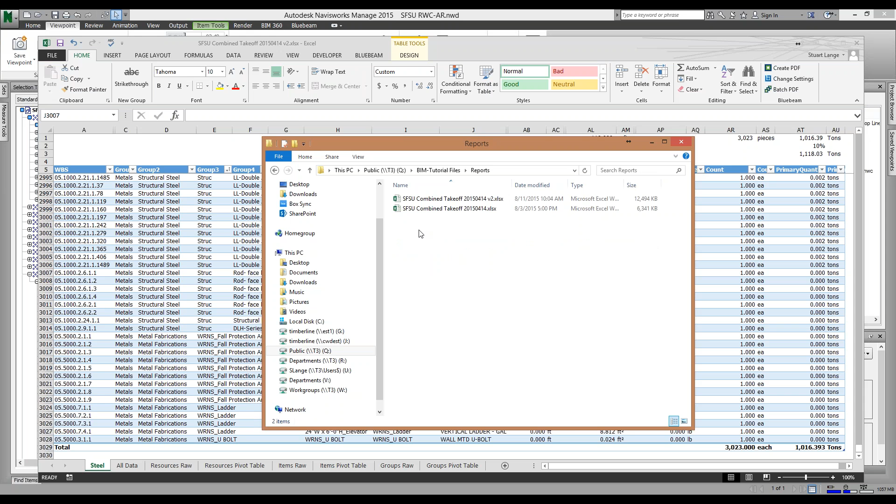And I wanted to show you, I dropped a sample report that I exported from my actual San Francisco job. If you look in the folders that I saved on the Q drive, under the reports folder, open up the version 2 one, SFSU combined takeoff, with a date and then version 2. So is it in the right one? Sure, it's in the BIM Tutorial Files. Okay, I see it. BIM Tutorial, and then reports. Oh, I don't have it. It must not have copied it over. Weird. So, at any rate, you can see on my screen.

You can export your takeoffs by that same button where we imported the catalog. You can say export quantities to Excel. When you do that, it pulls open an Excel file that looks a lot like this. This can be a little overwhelming at first, there's all these different tabs, but basically the main tab that you want to look at is the groups raw and the groups pivot table. In the groups raw, this is like the summary. If there were 15 different slabs of 24-inch concrete, it just shows the summarized amount of all 24-inch concrete. So somewhere over there it would give us the total quantity.

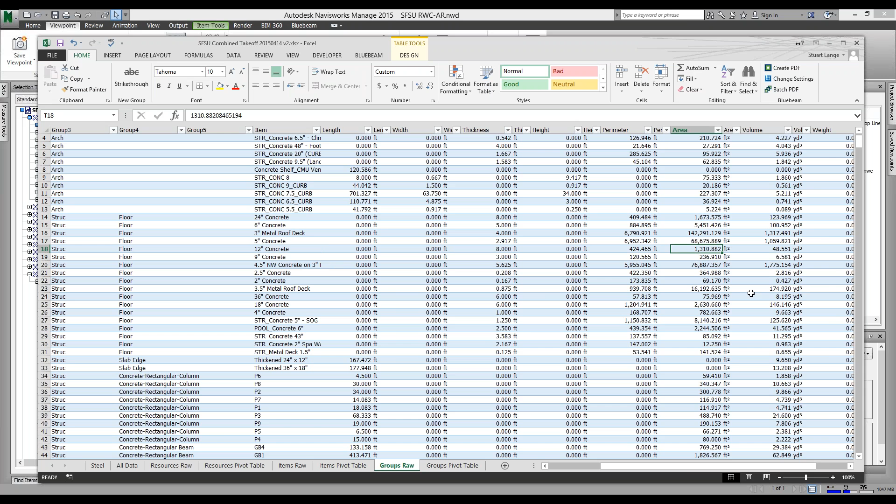Exactly. And so you come over and it has all of the categories. So 12-inch concrete, we've got 48.5 cubic yards. And then our area, there's our square footage. Based on your folder structure and your catalog, it'll give you different layers of information. This was under concrete, cast in place, structural, floor. So you can kind of tell the story of what these are.

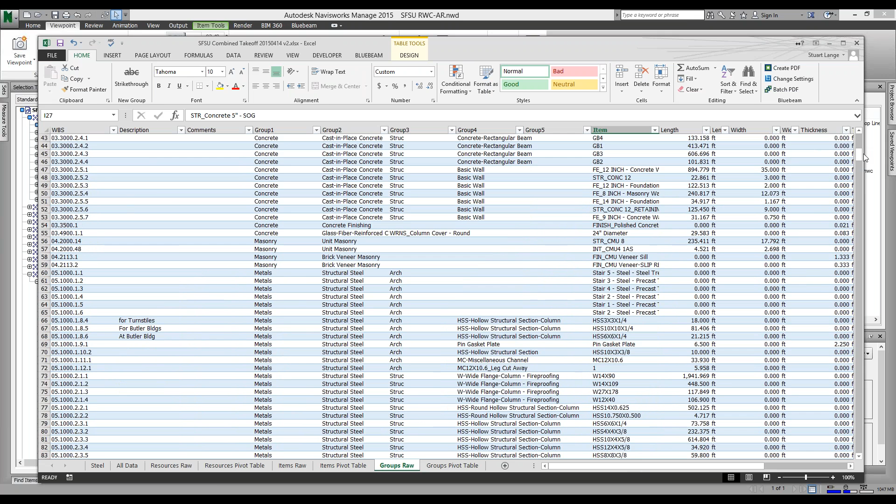Is this naming that the architect has named, or are these titles that we literally have to input? This is straight from what the architect said. The only thing that we did was this first group, concrete, and then cast in place concrete. That was in our catalog. Everything else was by the architect. So typically the architects would just put in the item, the group, and the item number. Is that typical, what you're seeing in how they work?

If we look in walls, I'm back in the model here, walls, basic walls, and then they have a group for each type of wall. This architect differentiated interior versus exterior, which is helpful. So that's pretty typical, where you have all the walls in one. Let's see, structural framing. In the architectural model, we have a little bit of structural framing, and there's usually a group for miscellaneous, HSS versus MC, so they tend to break it down in pretty logical ways. Sometimes it's not, though. And then you get down to the actual items.

So there is some standard stuff that you see. Casework, they broke down the countertops versus the cabinet fillers versus the cabinets. And then they have it by the actual call-outs for the base cabinets. Okay, so they have their grouping naming convention. Right. Okay.

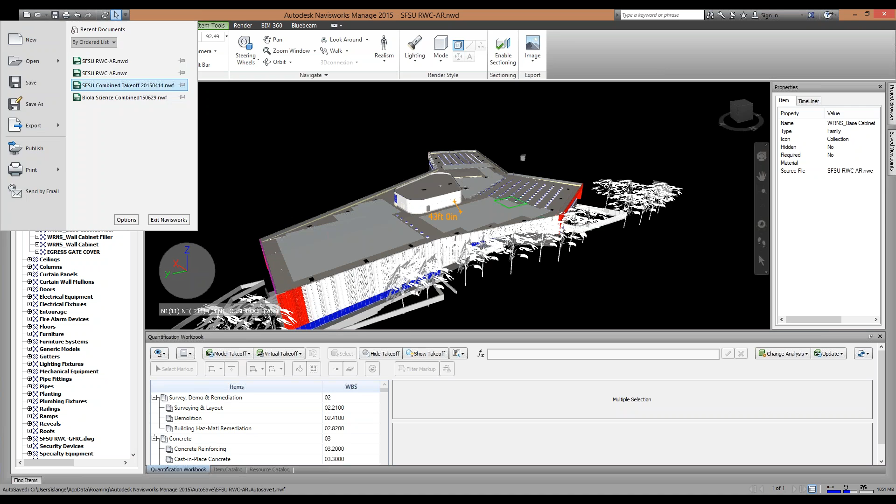So that's great. Okay, yeah, and I pointed it out to the team again, reminded them that they need to review the standards, because you had noticed some things that were a bit different than typical, so they've been warned. But anyway, that's the project that I wanted to start refreshing myself with Navisworks and run through Navisworks on. So that'll probably come down in about a couple months or so, I would imagine. So that's great.

Who's leading that? Go ahead. The architect is Hannah Gabriel Wells. Okay. And who's our PM that's running it? It's Hank and I right now that are running the pre-con side. But we have existing drawings. I've asked if they had it in BIM by chance, so I'm not sure if they do. It's an older building, but okay. See what they turn out.

Cool. Thanks for the little side note. Yeah. Sorry, Stuart. No, that's good.

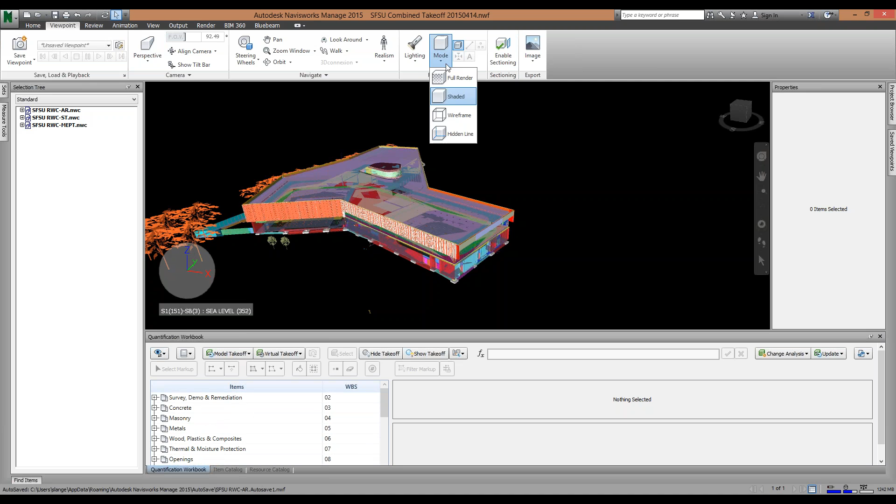Yeah, I was just going to show you. I didn't show you, you can put in all of the models right on top of each other if you want. So I have the architectural, the structural, and the MEP models all here right in the same file. So that's something too that can help with coordination. You can see all the systems together.

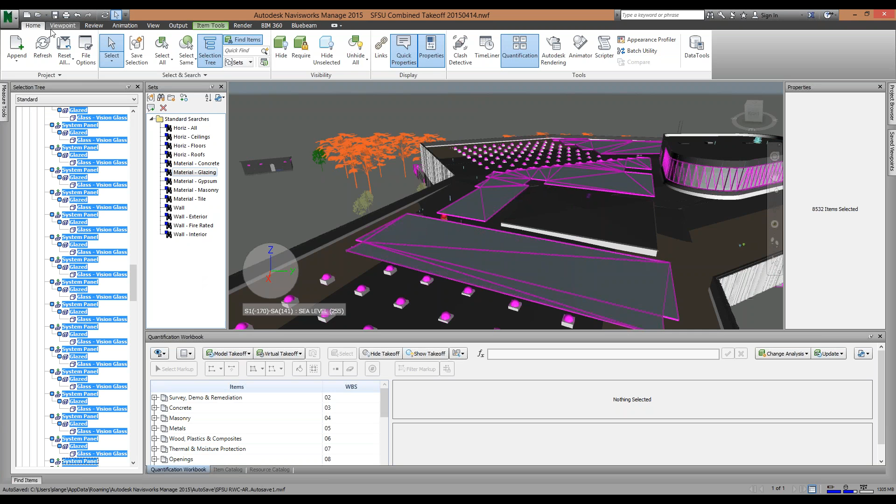And then one last thing I was going to show is search sets. In those standard setup files, I mentioned search sets. So you can set up these sets to look for certain properties in the model and then select them all at once. So I set up some standard ones where, like if you wanted to see all of the glazing in the project, you can click on this, and it may need to be tweaked because every model is a little bit different. But in theory, once you get it dialed in, you can come up here and say hide unselected, and then you can see here's all the glass we got on this job.

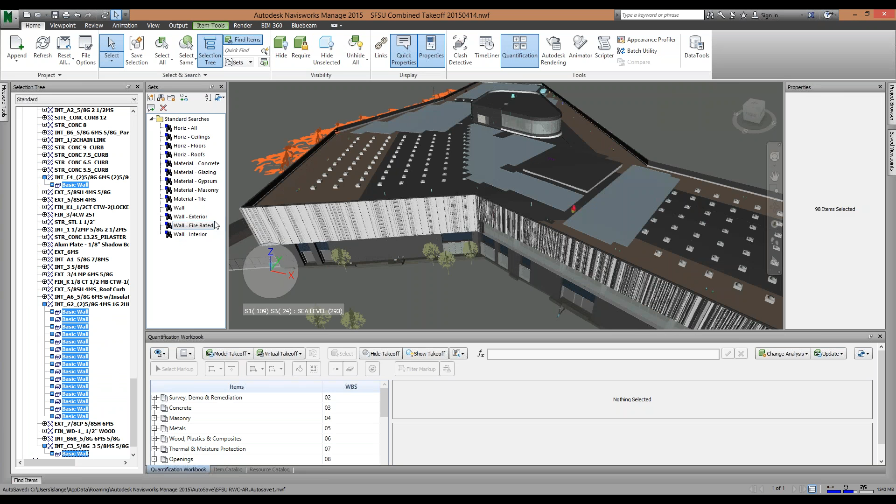You could either take all this off at once to get a rough square footage of just your glazing, or you can just analyze it. You'll notice that the solar panels came across as glass, so that wasn't quite right, and I may need to tweak how I did that search. And same with, you could find fire-rated walls. With this search, the architect always did HR, like 2HR rated walls. So that's what I did a search for. And here you can see, okay, there's my rated walls, and you could take all those off separately if you wanted.

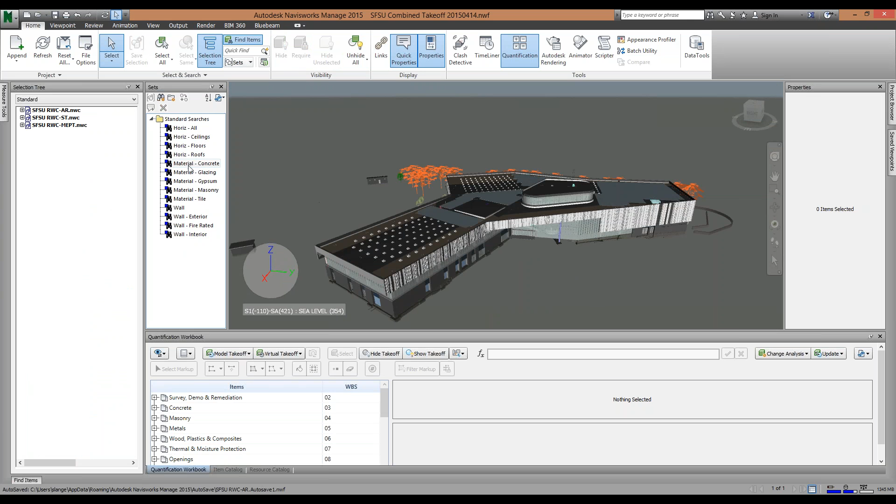And the sky's the limit with these search sets. So if you had a special thing that you were looking for in the model and wanted to capture, here's all the concrete. It picked up the GFRC and the concrete, it looks like. So that's another helpful tool that can be good for analyzing and for doing takeoffs. Again, it's all described in there, and once you get to that point, me and Todd are resources for you to make sure that we do it right and make your life easier.

I appreciate it. I appreciate your guys' time, so thank you. Yeah. Very cool. I can't wait for the Mesa to get their drawings done so I can do my initial pass on this and see if I can do it right. Yeah, let me know when you get that, and we can go through it together the first time. Okay. Yeah, I appreciate it.

Awesome. Okay. Well, thank you so much, gentlemen. Again, this is taking an old dog into the new techie. Okay, don't be afraid to reach out, though. Stuart has done a phenomenal job taking this from where I had just started, really impressed. And we want to help save you time and utilize some of these tools so you don't have to do the quantification as much, but can spend more time understanding what's in the project.

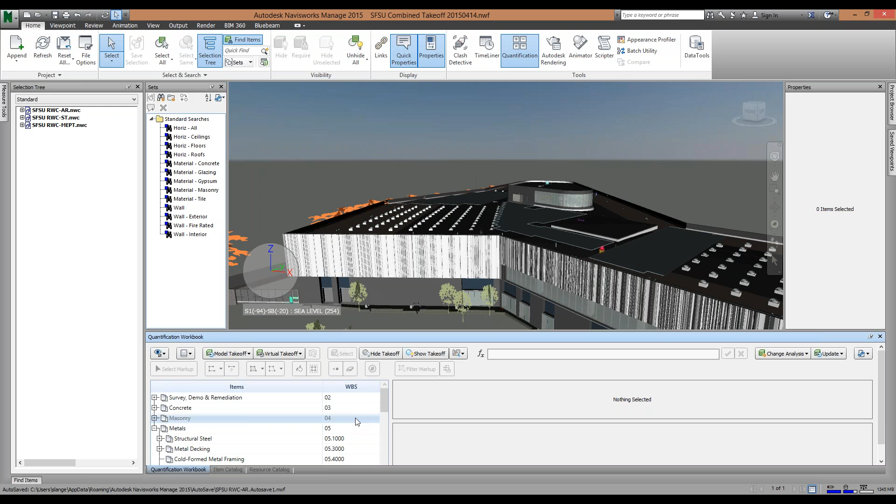I think it's just an added tool to give the owner more confidence that we understand the project and can maneuver around it, and that we're doing double checks. This is the information the designers have given us, and if something's changed, we can hone in on it, or the client or architect can show us, hey, did you remember this, or we actually added something in this area. It's a lot easier to visualize in 3D.

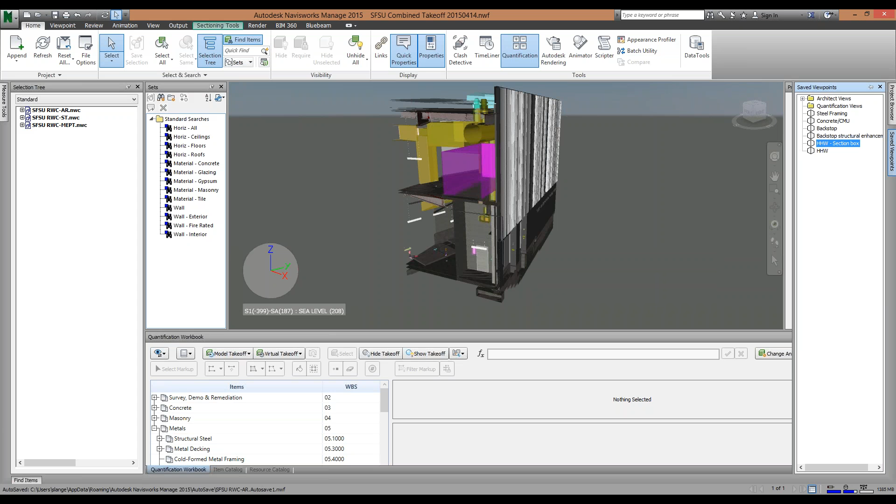Totally. And you can section down the model too. I know I just keep throwing on add-on things, but I like it. We can find things - it's a lot easier when we're doing our estimate if we can't find a cut or can't visualize how three different angled elements intersect in one corner. This definitely helps us visualize it from our side.

Is that a squiggly, an artistic element, or is there a note there? Yeah, no, this is a markup. It's nice, huh? Very pretty. I like it. It's called the red blob. They wanted it, I don't know why. Wanted to see if anybody noticed it, huh?

You can do markups, 3D markups, and send screenshots. This was, I was trying to show - we were looking at where this heating hot water entered the building. So I was trying to show that to one of the subs. It's a great talking tool - in 3D you can understand things so much quicker. But you got to know how to do it too, that's the tricky part, just getting familiar with the software to be able to do it.

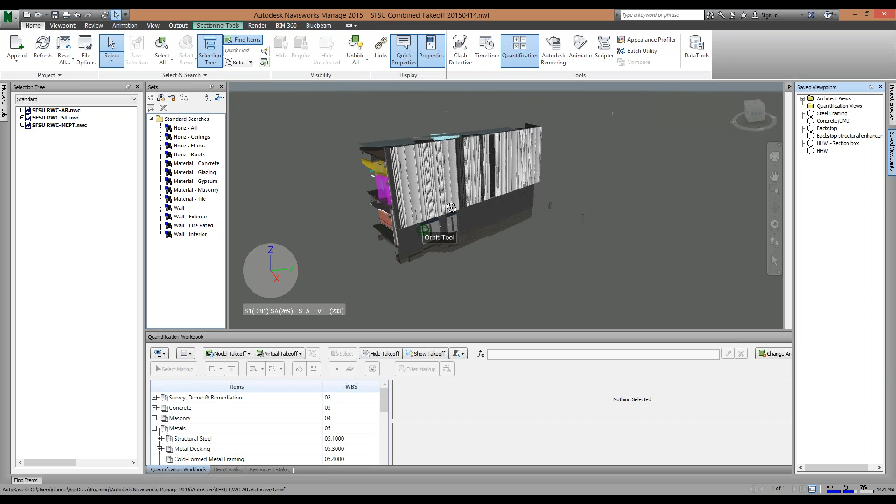Yeah, no, I definitely like it because even not just with the subs, we have a GoToMeeting now. We can pull this up and say, hey, this is what I'm talking about, did you include this cost, or what is this cost, or it's just this simple little thing right here - it shouldn't cost that much.

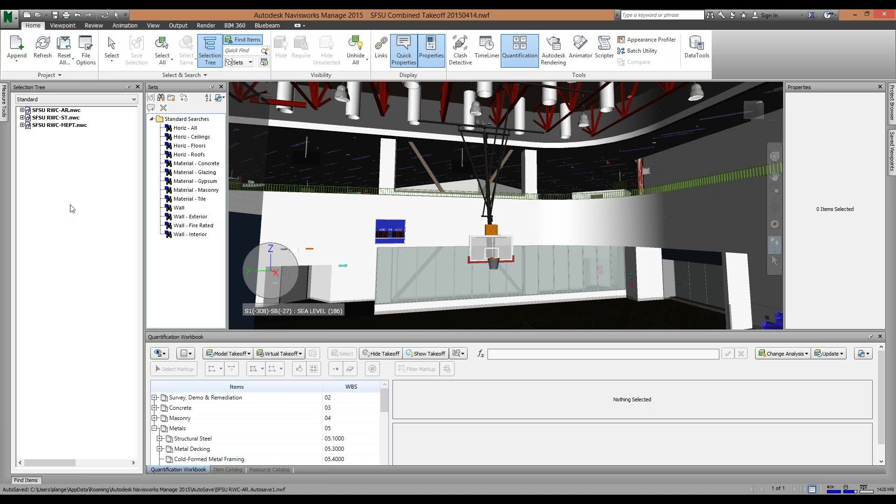So I know it's hard, this one I think was - there's so much, and this has always been my problem, with these Bluebeam trainings too that I've done with estimating, there's just so much I want to keep piling on, but I gotta keep it short, keep it simple, not try to mention everything. Yeah, but it's a fine line. But I think you've done great, you've had good documentation to back it up, and then we're always here as another resource.